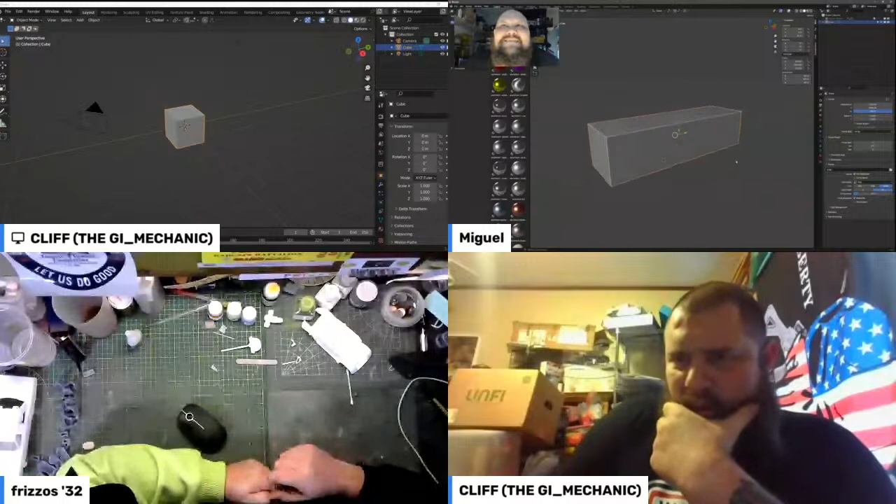I just have the switcher, so I just clicked on general for start off. Hey Frank, did you ever get it downloaded? Yeah, hey, I got it downloaded. What's going on, Jimmy? Yeah, I got it downloaded. Can I share it too? Cool, yeah, let's do it. Yeah, if you want to. All right, so we got that.

Let's see, click edit object, edit mode. I remember that. Woohoo, this is fun. And then face extrude. Whoop, no, that's a whole block. I just wanted to see. Yeah, whatever you have selected is what you're going to duplicate.

So just that part of the block. We wanted to run along the x-axis, which should be the left and right. So left and right. I'll show you a better way to do that, Cliff. You're taking really the hard road, to be honest.

Go back into the perspective where you're at an angle where you can see the perspective. Hold your middle mouse and rotate your camera around to give yourself a good view. Rotate it around so you can see the face that you want to extrude.

Now, I don't know if you know this, but pressing 1, 2, or 3 will put you into either vertex, edge, or face mode. Vertex is a single dot. An edge is a line between two dots, and a face is the flat plane between multiple dots. So put yourself in face mode by pressing 3, and then select the face that you're in.

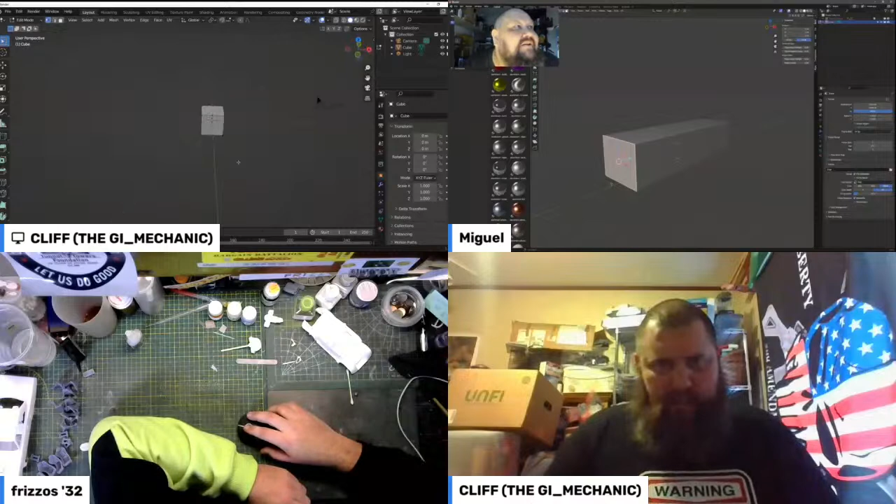Okay, move your middle mouse. Click your middle mouse and move your camera around. So click the middle mouse button. There you go, yep, okay. There you go, go, give yourself that view, yep. All right, at an angle.

You're trying to go straight on, Cliff. You need to get out of that mindset. No, stop clicking buttons. All right, put your mouse in the middle of the screen. Oh boy. Press the middle mouse button and hold it and move your mouse until you get a view that you want.

And you put yourself into that, you click that little button and put yourself into orthographic view or whatever. Press your 5 on your numpad on the right of your keyboard. Press your 5 to get yourself out of that.

If you go in and out of orthographic view, it does weird things about perspective, and it's annoying.

Okay, I couldn't get the view. I want you to have a basic view like this, look at my screen. I have my cursor in the middle of the screen, I'm pressing my middle mouse, and I'm moving my camera around. This is what I want you to do. Let me get used to moving your screen view here.

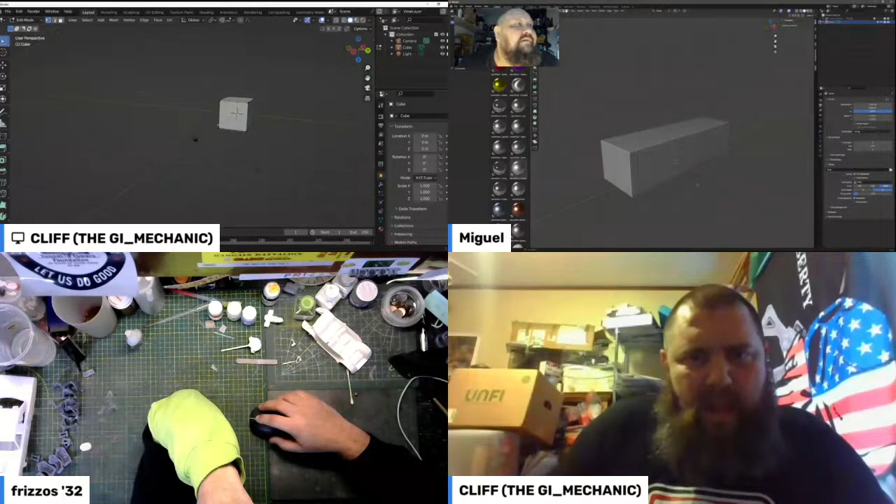There you go. Oh, you must be on a laptop. We're moving. I'm on a laptop, yeah, it seems to be a bit laggy. I got a separate mouse. Well, yeah, I know there's kind of lag, but that's okay. I've got a separate mouse, so it shouldn't be.

So anyway, back to what we were doing. Go ahead and get yourself into a perspective kind of like where I am, where you can see the face that you want to move or extrude. Okay, and then go ahead and select that face.

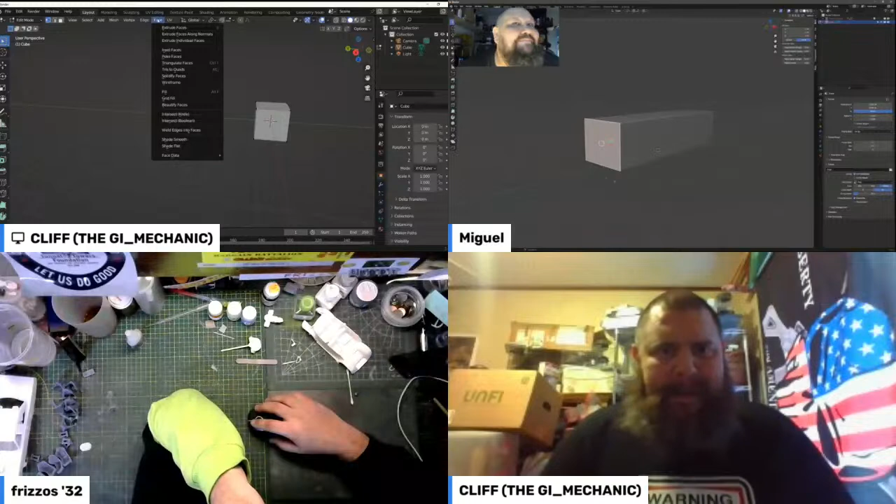And stop trying to put yourself at 90 degrees off angle. Look at my view, you gotta put yourself into a similar angle.

All right, I'm gonna have to minimize this for a second. Hey, Ron. What's up, Jamie? What's going on?

You want to be able to see the perspective so that you can get an idea of what you're doing. You don't need to be 90 degrees on, left, right, front, top to do this stuff. In fact, it makes it harder. You want to be fluid.

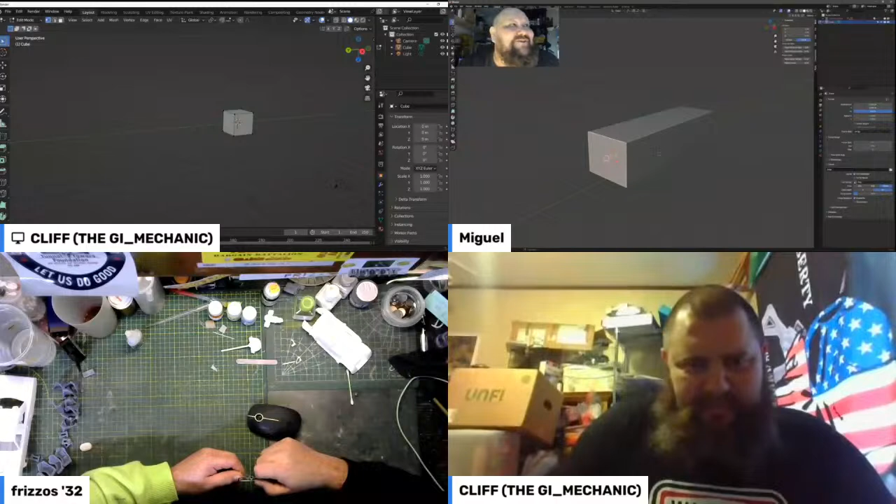I think that's part of my thing, I'm used to. I understand, but this is not 2D CAD anymore, this is 3D Blender. So click on that face, the face you wanted to extrude. Now I'm going to show you an awesome way to do this.

No, I didn't say drag and click. I said click on it. Are you in face select mode? Press 3, the number 3 up on the top of your keyboard. Now click on the flat face, just one click.

Whoa, what the hell? I just clicked. Nope, god dang it, that didn't work out. All right, hold on, I don't know what you just clicked. I just hit 3 when I clicked on the face. Well, that's because you hit 3 on your numpad.

You need to hit 3 on the top of your keyboard, not on the numpad. All right, top of the keyboard, here we go, 3. And it just brought me to that when I hit 3 on the top row. You know what, you're on a laptop and it remaps the keys. That's okay, that's my bad, I forgot you said you were on a laptop. I wasn't thinking, that's totally all right. Maybe that's why I'm struggling too.

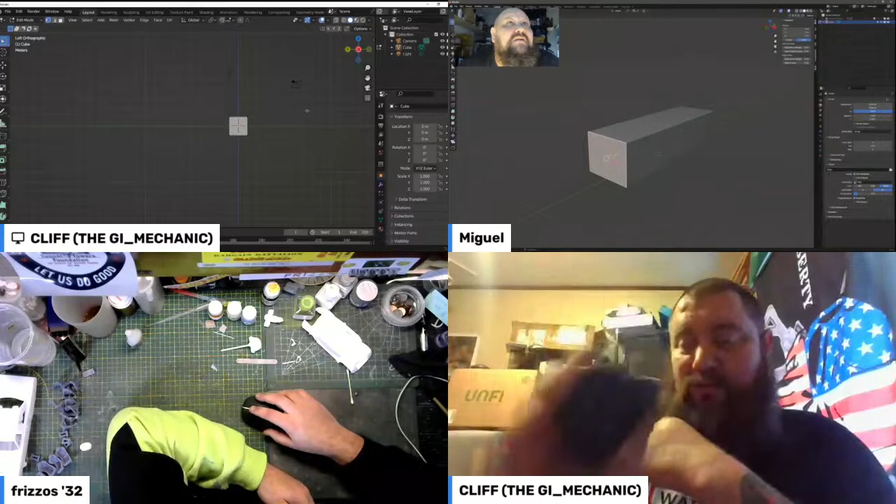I'm on a laptop versus, I got a separate mouse, which is cool, which works. Look it up? What, the mouse? Yeah, yeah.

All right, at the top of your screen, just to the right of the little dropdown where it says edit mode, there's 3 little pictures: one is a dot, one is a line, and one is a cube. Make sure you're in the third one, which is face mode. Click on that.

And then go click on that face on your cube. And there you go, see that? Oh yeah, okay, that makes a lot more sense now. You don't have to select all of the dots, you can select just that flat face if you're in the right mode.

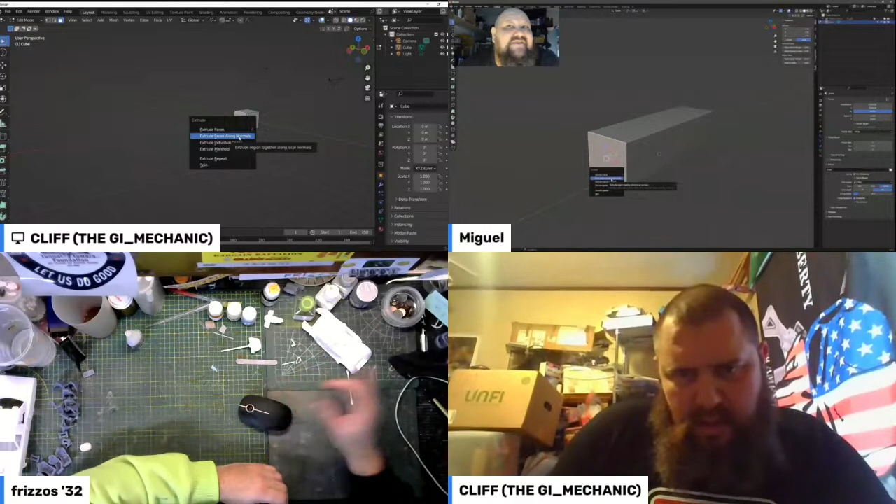Okay, so now hit Alt E. You should get a little pop-up menu that gives you the option to extrude: extrude face, extrude individual faces along normals. Now, in this case, because we have a flat face and we want to go straight out from that flat face, go ahead and select extrude faces along normals.

Along normals, and then move your mouse up and down, and you should be able to move it in and out. Now, if you hold your shift key, you go into a minor adjustment, so it slows down the edit that you're doing. Instead of doing it super fast, you can slow it down.

So now you've extruded that. If you wanted to get a specific size out of it, you could hit 7, 1, or 3 to go into those side views, top views, whatever, and then use your G key to move those faces to the specific grid point that you wanted.

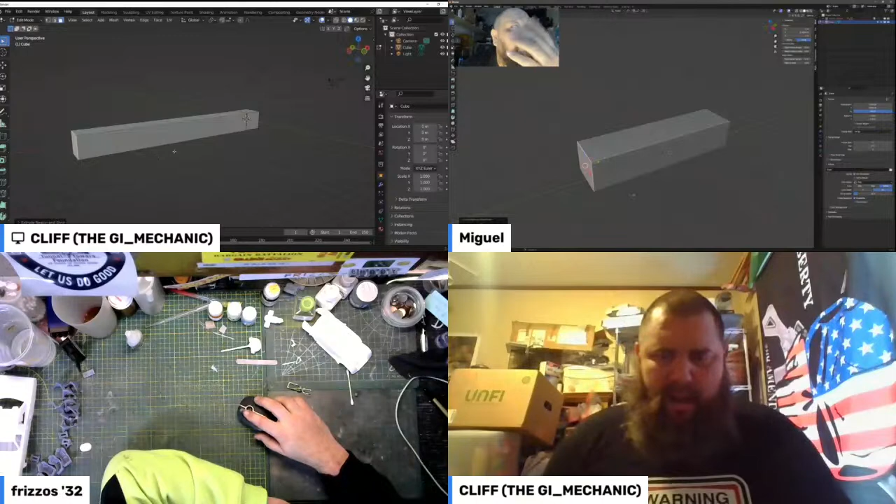At this point, we're not really making anything specific, so we're just kind of playing with controls. But go ahead, and now I'm going to show you something.

Move your mouse cursor over one of the edges and press Control R, and you'll see a little yellow line appear. That creates an edge loop around the object, and if you click your left mouse button once, you can slide that up and down the edges it encompasses. Position it into the location you want, and once you're ready, press your left mouse button again.

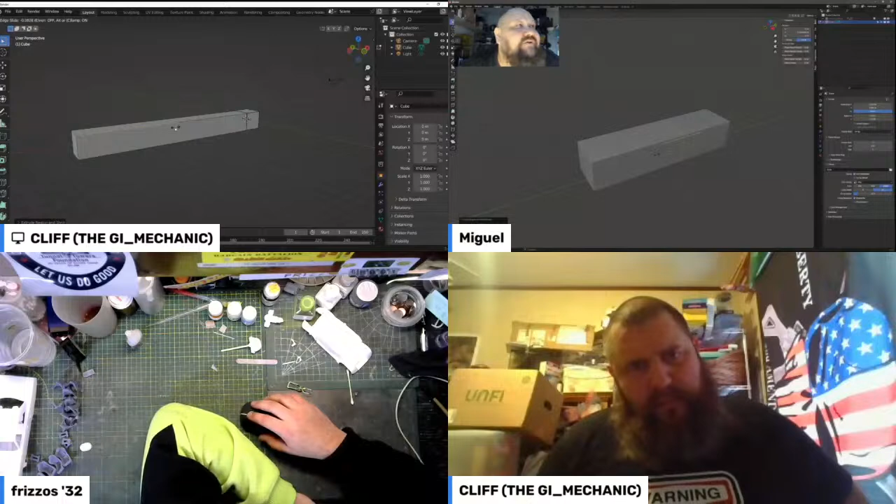Now, the thing to notice here is if you click that little cube at the top again to make sure you're in face mode, because doing that puts you in edge mode. Go back to face mode. You'll notice you have multiple faces now on the side, one on the left and one on the right. You can click those faces.

Look at that. So now if you do that Alt E where you're extruding along faces, you'll push that face away from the object, or into the object if you're trying to do a recess. You'll see how you can create little appendages.

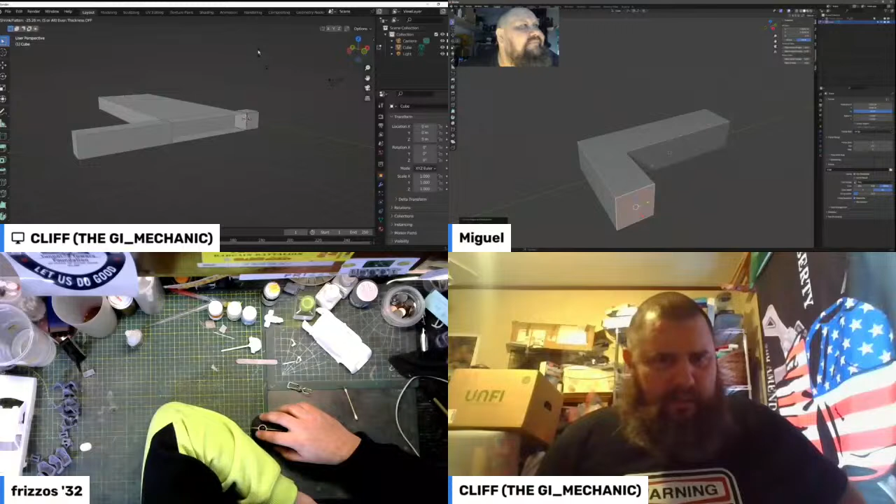That's awesome, we're good for doing a cross member. Yeah, because that was the biggest problem I had—trying to get the shapes the way I wanted them, but getting them lined up between the different perspectives.

Well, that's when you've got to use your X, Y, and Z's. So go ahead, let's start over. Hit Control N, then G, then D for don't save. Control N creates a new file, G is the type of file, and D is don't save. So we're basically just starting from scratch.

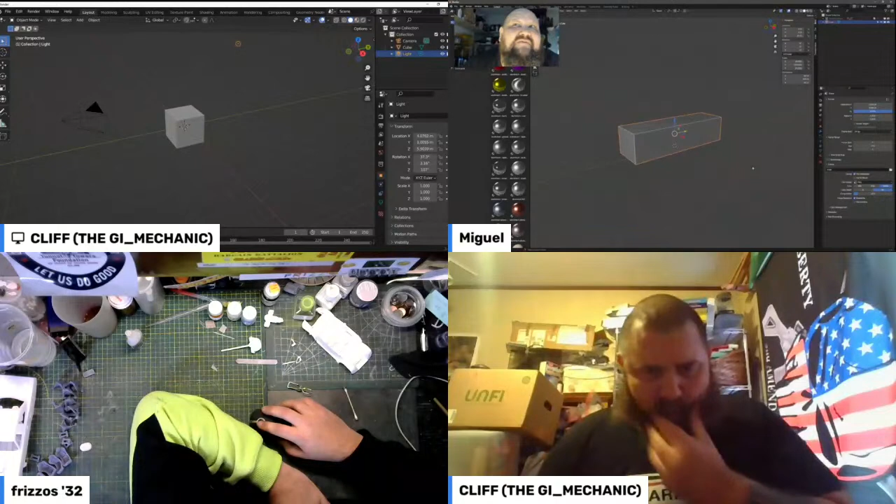So what I want to show you is that thing we were talking about the other night. If you hit G and just move your mouse, you can see the box just moves freely around. Go ahead and do that—don't click anything, just hit G on your keyboard, and move your mouse around.

This is kind of annoying because you can't control where you're going. But if you hit X, Y, or Z, you can lock it into that plane of movement. So you hit X, and now if you hit Y, it'll move to the Y axis instead of the X axis. Z likewise.

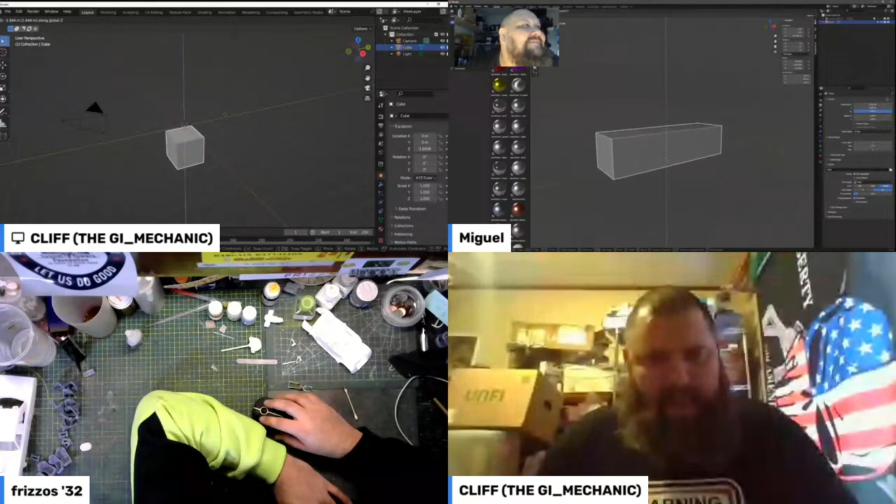Once you get it where you want it, you can press your left mouse button to lock it into its current location, or you can cancel by hitting your right mouse button, and it'll go back to wherever it was.

Awesome, so now we've got this cube. Let's go into edit mode, and then hit Control R to create a loop around the cube. Hover your mouse over one of the lines on the cube—it doesn't matter which orientation. Then left click it and then right click it.

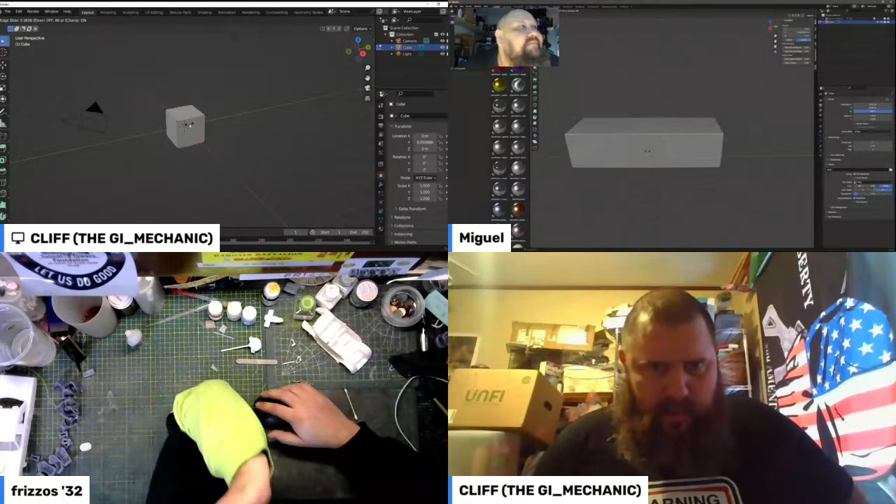Left clicking says yes, I want to go ahead and create the loop cut. Right clicking cancels sliding it up and down, so it'll move it right in the center.

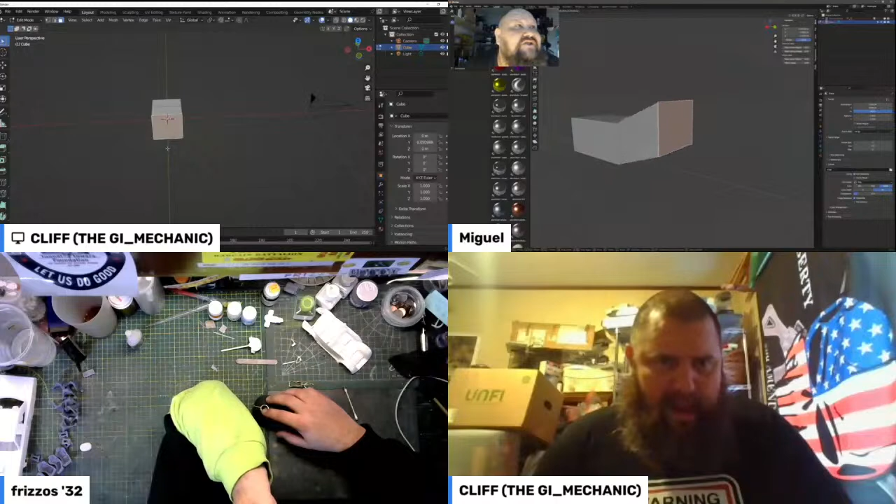One thing I wanted to show you: rotate around to one end of the cube, make sure you're in face select mode by clicking the little cube up top, the 1, 2, or 3 option. Now click on the end face, hit your G key, and you can do the same thing you did with the whole object, but with just geometry—one vertex, one edge, or one face.

You can move things around, and just like moving objects, you can press X, Y, or Z to lock that movement into an axis.

Or to get really fancy, you can press R instead of G. If you right click, go ahead and right click and cancel that. Now press R, and you can rotate it.

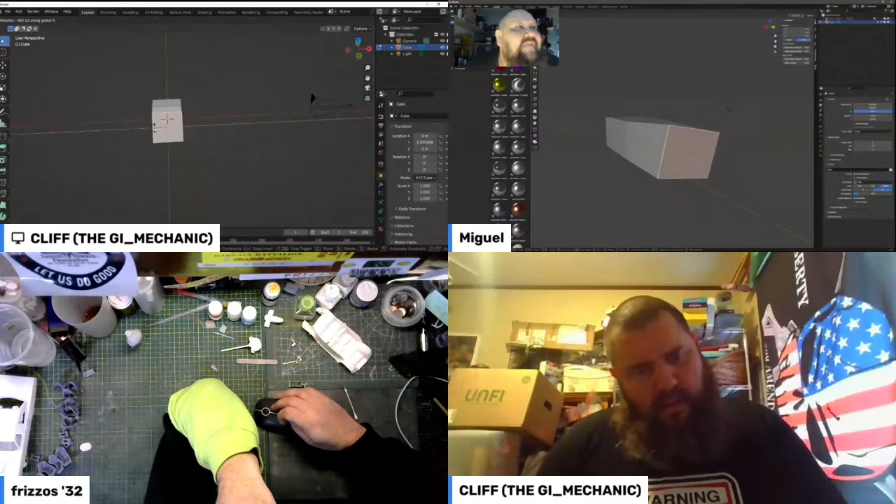Rotating it is based on your camera perspective unless you hit X, Y, or Z. If you hit X, Y, or Z, it will rotate whatever you have selected on the axis you specify—so the y-axis rotates the geometry around the y-axis, or the x-axis if you press X, etc. Go ahead and test that out a little bit to get familiar with it.

Notice how it's maintaining a connection between those vertexes and the next one in the line, which is like your halfway point on your cube. It's maintaining the line between. That would actually work for making something like springs. Yeah, you can do all kinds of stuff with this.

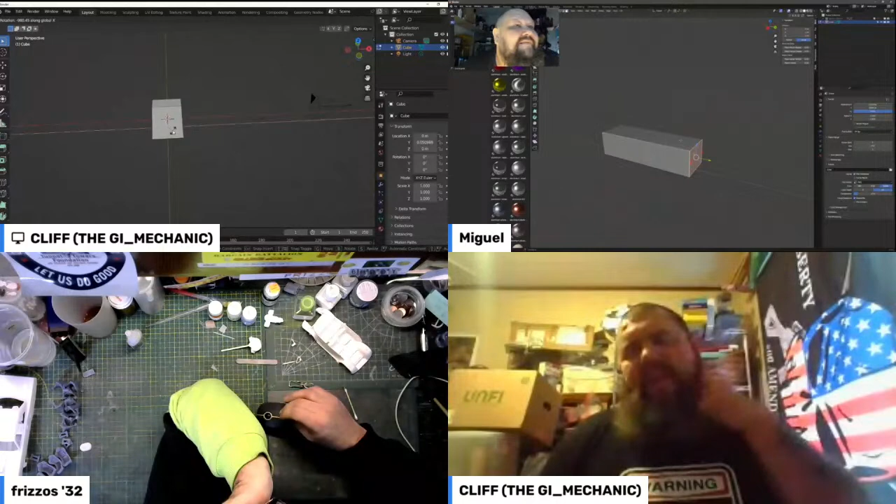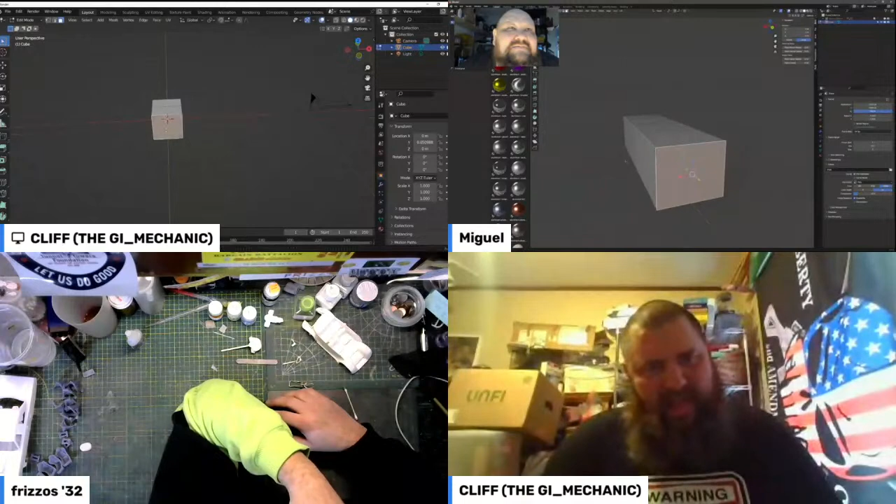I don't know, maybe I was thinking like 2D stuff. That was true because I started messing with grease pencils. Let's try doing something like that. Honestly, I don't even use grease pencil. That stuff is way too technical. What's the word I'm looking for? Tactile, like you gotta draw. It's just too technical to be useful for what I do. In hard surface modeling, I don't need the grease pencil. I don't need the knife tool. I've used the knife tool maybe twice since I started learning Blender. It's just not that useful to me.

Okay, so put yourself in vertex mode instead of face mode, which is the first of the little three cubes up top.

Wow, all right, yeah, let me. There we go, you're having fun. I forgot to click off. I'm trying. That's okay, just keep in mind right-clicking cancels whatever you're doing. So that's what I forgot doing. I went to go click... I didn't mean to do that.

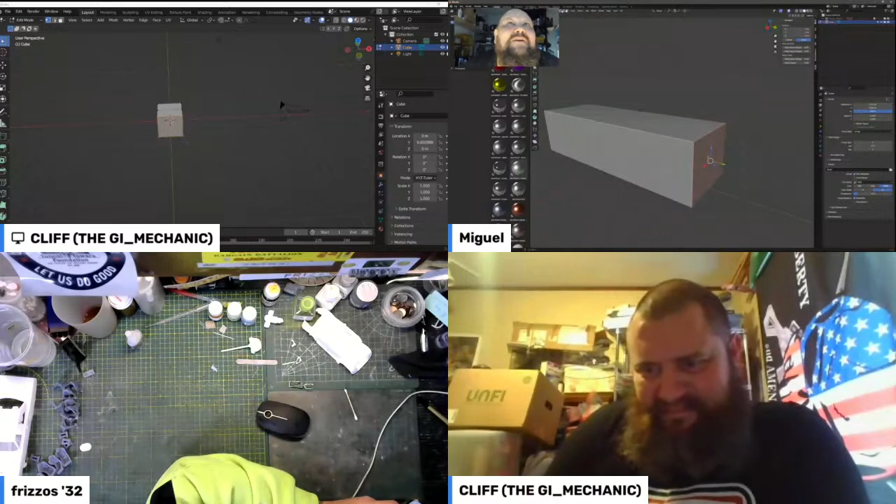You can just right-click. So if you put yourself into vertex mode, which is the little dot icon next to your edit drop-down, you can click one dot at a time, and just like moving the object or the face, you can hit G and move one vertex around. You can move one little dot and change the whole shape of the object.

Jamie, we're going to do this probably two or three times a week. We're going to do this on Tuesdays, Thursdays, and Saturdays. Sounds good, and I do much appreciate it.

Just like the others, you can hit X, Y, or Z to lock your movement of that one dot into the X, Y, or Z planes.

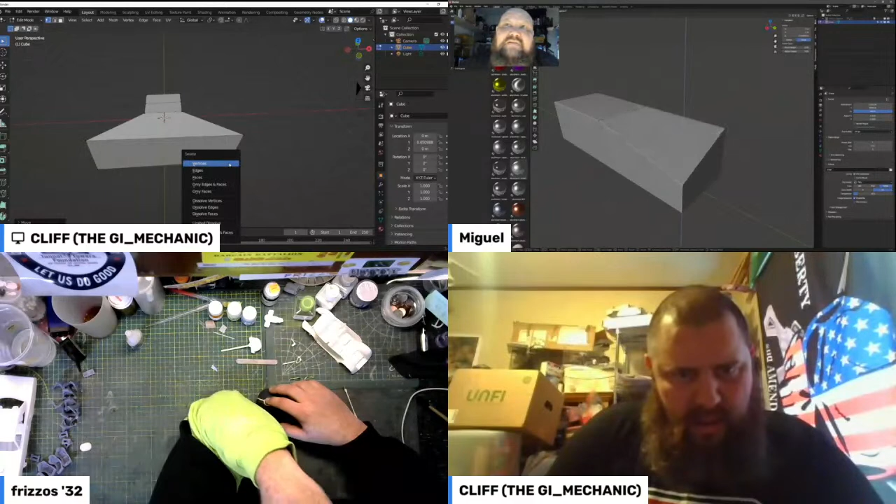Oh, that's right, never mind. All right, we got that. We got that.

It's really these basic controls that you need to get really comfortable with, because when you get comfortable with these controls, you can do things so fast.

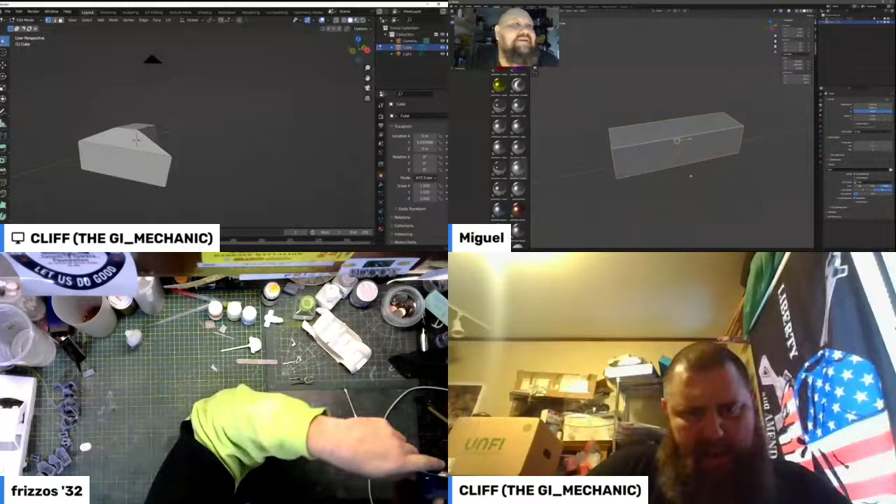What's up, John? I've been glad to see your little shorts and your little videos you've been posting lately. It's good to see you active again. What's up, Dan? Looks like an air shop vent. Yeah basically, that's what I don't know. I was just going something a little different, grabbing, pulling edges. Daniel, John, how we doing?

So let's do this. Let's hit Tab to go back into object mode instead of edit mode. Then click on your object and press H to hide it. All right, there we go, hide. Now hit Shift+A and that'll bring up a little menu. Select mesh, then cube, and that'll give you a new basic cube.

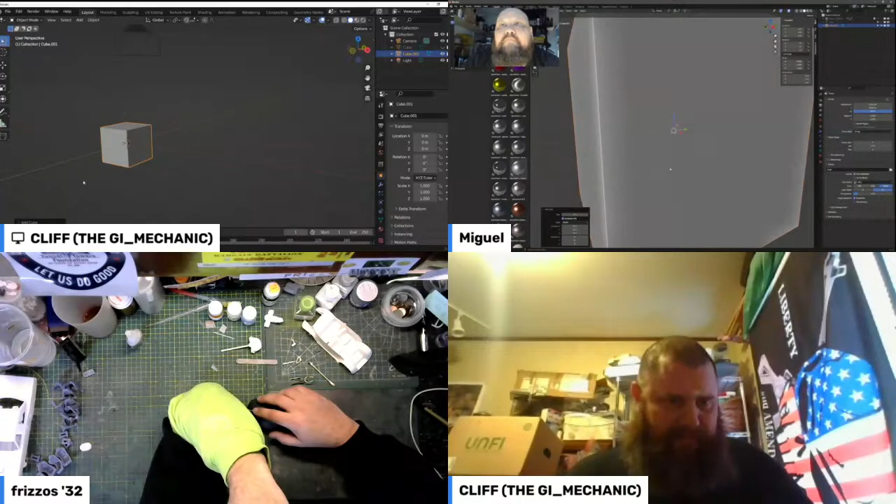So if you hit Tab to go back into edit mode, I'll show you another trick, and we'll put a loop cut around the center. We'll hit Control+R right around the center. Hover your mouse right around the center of the box. There you go, yeah just like that. Either one of the vertical ones, let's do the vertical one. Okay, that'll work.

Yeah, all right, we click E. So now let's go into face mode, press the third little icon up there. Now what I want you to do is select one of the side faces, or in your case, the top face of your cube.

Now while you have that selected, hold your middle mouse and rotate your view so that you can see the opposite face, the bottom. Rotate it so you can see underneath. Yeah there you go, now hold Shift and click on the bottom face.

So you always start off with a cube. Now you have them both selected. You can hit Alt+E and do extrude faces along normals, and you'll extrude them both at the same time. Oh yeah, that's awesome, that's what I'm talking about.

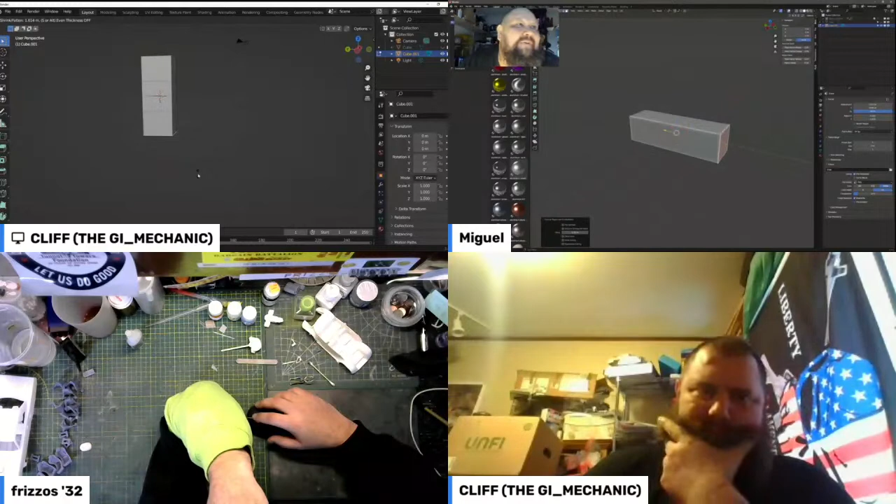This is useful if you're doing things like making leaf springs. You want to start with your center perch and then move out. There's all kinds of different approaches. Symmetry is one of the biggest tools in Blender, it's awesome, I like that.

I like that. And another thing is, like in my case, if you see my cube, let's say I was making leaf springs, let me make that bigger so we can get kind of an idea. Now I could come back, and if I hit Alt+Z, I'm in X-ray mode.

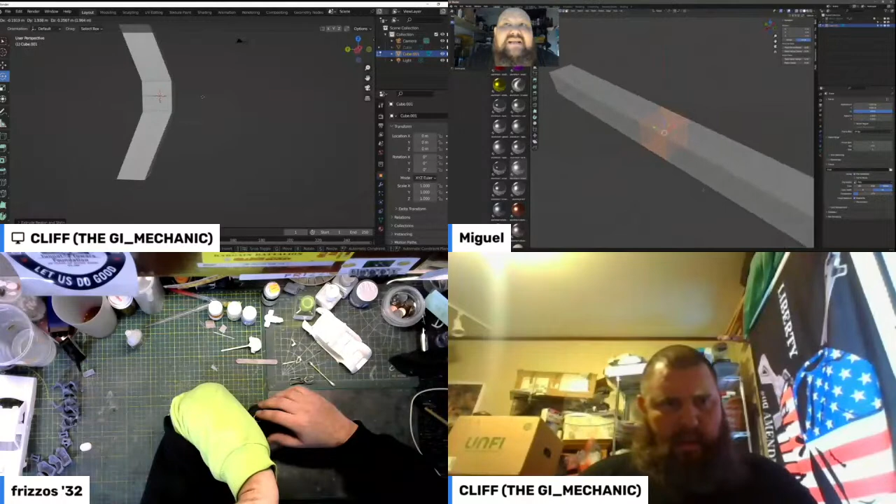You can kind of see through it. If I switch to vertex mode, I can see all of the vertices in the model, and I can click and drag to select them all at once while I'm in X-ray mode.

X-ray mode has an icon at the top right of your screen, it looks like two little cubes, one inside the other, to the left of the four globes. You can turn that on and off to see through your object and see all the geometry, the dots, edges, or faces, depending on what you have selected.

So now because I have those selected, I can move them up or down to give myself the shape that I'm looking for.

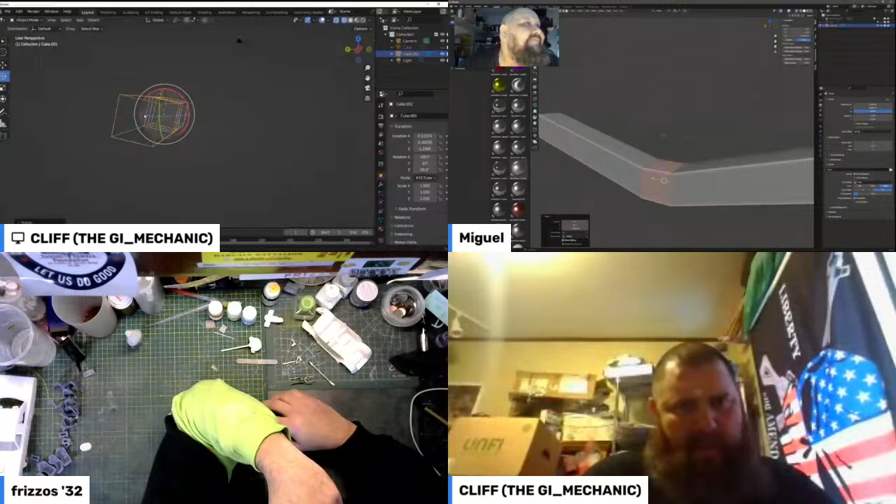I'll show you another useful thing here once you're ready. Oh, you've got it rotated? Yeah, there you go. Let me show you something, Cliff. Go ahead and right click to cancel that. All right.

This is a Windows program, I'm assuming you're using it in Windows. So like every other Windows program, you can hit Control Z and it'll undo whatever you just did. Go ahead and hit Control Z until you get your cube back to a straight and level orientation. All right, give me a second.

Control Z, and see how you can step through it. So now you have, oh, you went too far, you went back to your basic. That's okay, see if you can get it back the way you had it.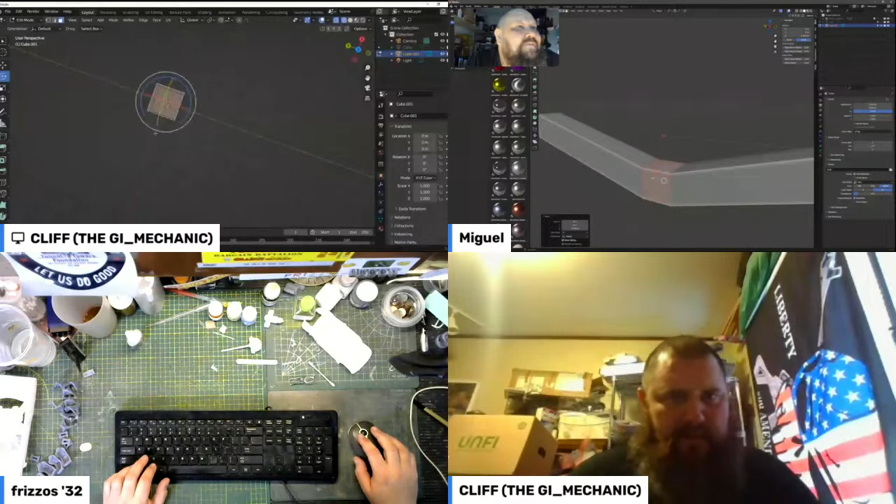We gotta go edit mode, faces, change camera view, click on face. What's up, Brian? Blender, that's 1, exactly right. Blender 101. No, Blender 1. Blender 01. 0001.

Oops, I forgot to do the bottom side. Let's see, on the face. Shift click to select an additional geometry.

All right, hold on, probably. Anybody that wants to do some Blender stuff, you're welcome to jump in here. We're going to do this a couple times a week.

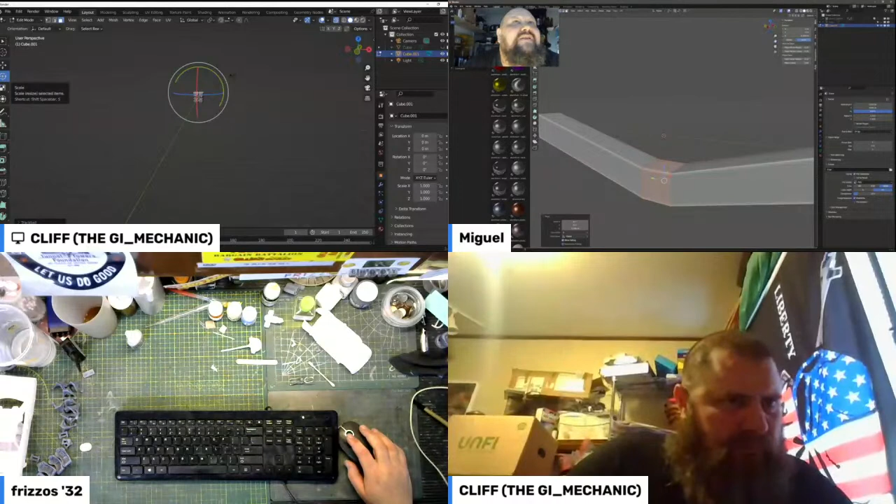The reason you have those circles around it is because on the far left you see the list of icons, those are your tools. You have the rotation tool selected, so go ahead and select the top one. There you go, you're back to normal now.

The other thing I'll show you, let me show you another neat trick. If you click on your object, or a vertex, or a face, or anything, you can press the period key on your numpad to center your camera on whatever you have selected. It zooms right in too. Crazy.

If I was on the big PC. Well, maybe one of the future ones, Dan, Brian, you guys can jump in here, you're welcome to mess around. Yeah, definitely, like I said.

So take yourself out of X-ray mode, and then you won't accidentally click on the back side of things if that's a problem. But the advantage of being in X-ray mode is if you can see the backside and you want to select them, you can drag select both the top and the bottom at the same time.

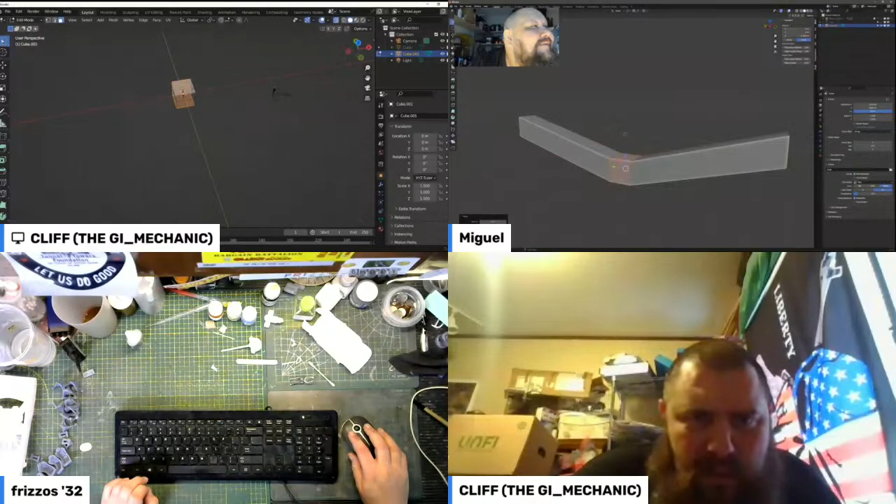Shift click. Did I put that box into? Yeah, I'm sure I did. You selected another box, yeah, or another face. There's that one, and then there's shift. Boom, there it is. Faces is highlighted.

All right. No. Okay, well, we're extruding along that axis. So...

I don't know what you're doing. Just stacking boxes, that's all. Let's do this, Minecraft, right click to cancel. He's doing Minecraft, what are you doing? Let's go into click and right click, object mode, let's go into object mode and reset. Shit, we'll be here till Tuesday.

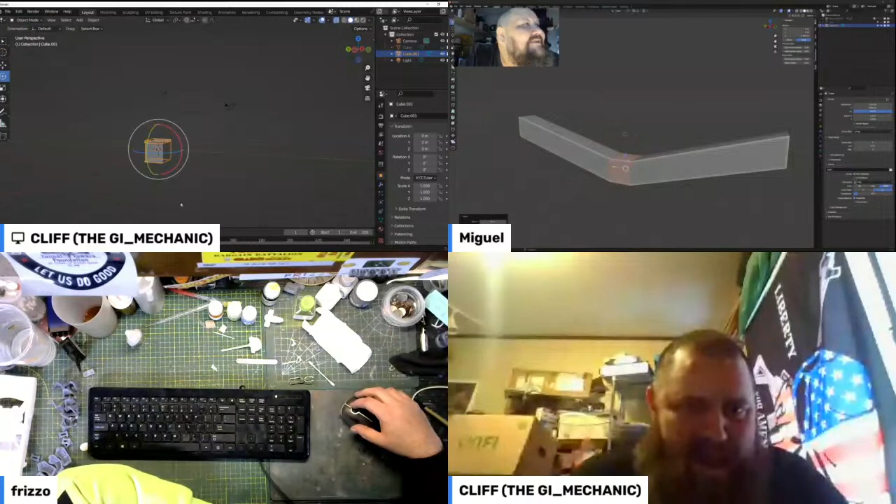You just hit your tab key, you put yourself in rotation mode again. I don't know what key sequence you're hitting to put yourself in rotation mode, but click the top icon in your toolbar. On the left toolbar, on the left tools, press the top one.

Click the top one. Got it. All right, so now let's delete that cube and start from scratch. Hit your delete key. X delete, I got good at delete, okay, so X works too.

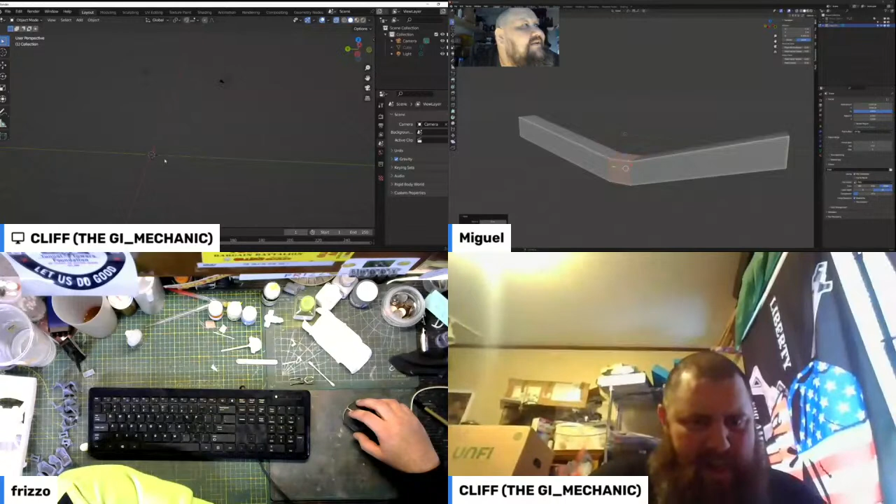Go ahead and hit Shift A and create yourself a new cube. Don't use the menus, I want you to learn the hotkeys. Hit, now listen to the words coming out of my mouth, Cliff. Hit your delete key, not your X key, your delete key. There you go, then you don't have to confirm it.

Now Shift A, not Control. Whoops, sorry, my bad, I'm in Control A. Mesh, and select Mesh Cube. Booyah. Yep, I see. Boom. All right, so now tab to go back into edit mode.

And now do a Control R and create yourself a little loop right in the center of your cube. And boom, you're back to where you started. Left click. So now put yourself into face edit mode and let's select those opposite faces.

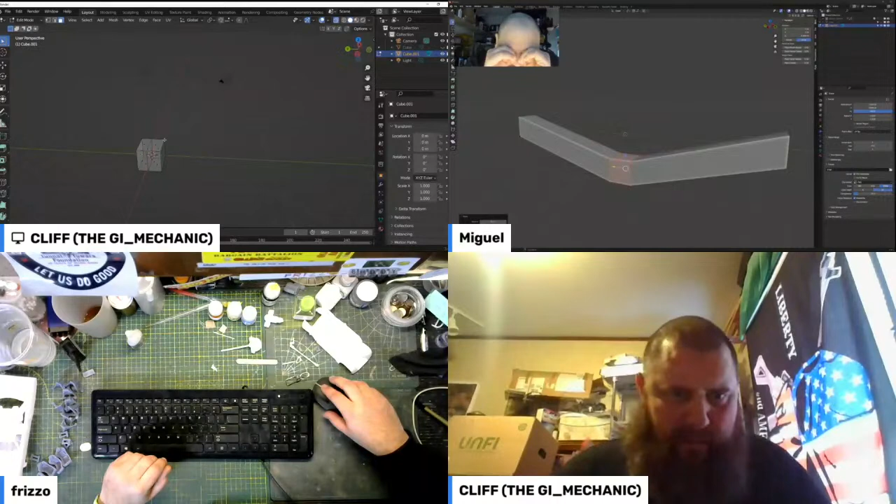No. I just have a glorified box. What's that, Frank? I just have a glorified box. 3D. Well, that's all I have. Now you can do your Alt-E, extrude along normals.

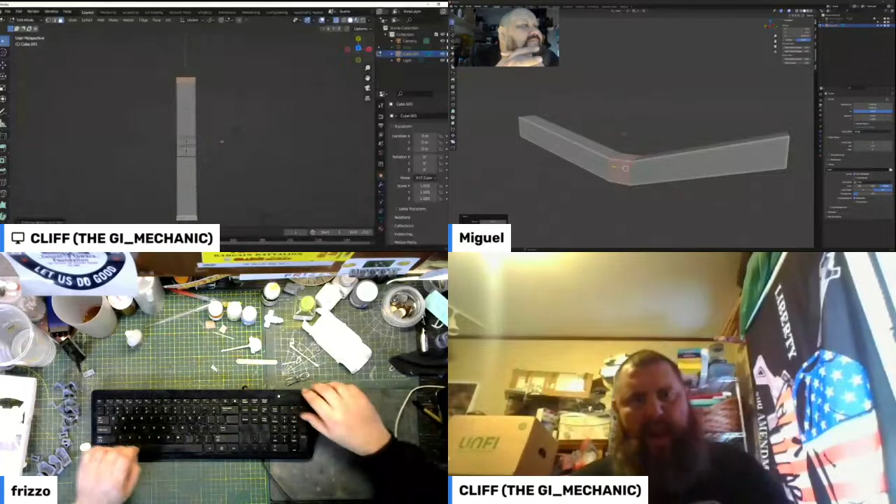You can't see what you're doing because you're... there you go. Cool, yeah, that works. So now move yourself to like a 45-degree view so that you're not straight on any one angle.

Do you have, I can't tell, do you have, yeah, you have X-ray mode on. Turn your X-ray mode off. I want to show you another neat trick.

All right, so make sure you're in the face select mode. So you, okay, and then if you hold your Alt key and then click next to one of the little edges on your object, it will grab all of the faces around the loop of the object next to the edge that you're selecting. So Alt and then left click near one of the edges, not on it, but near it.

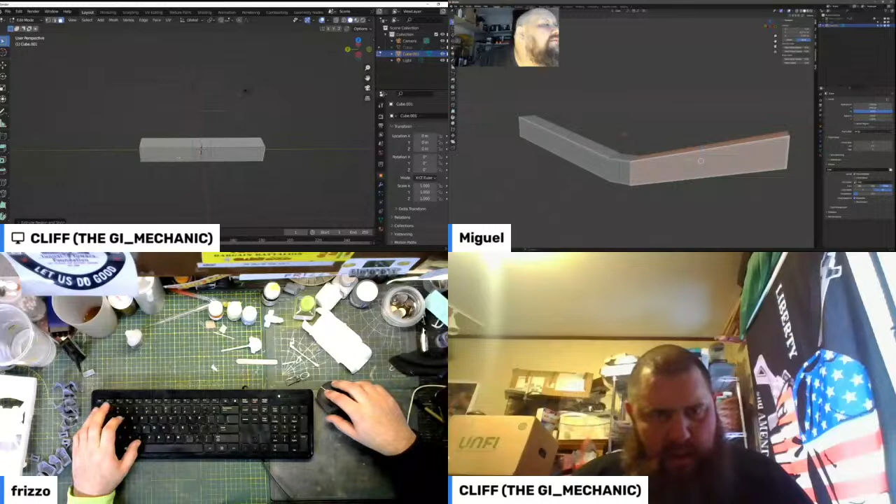Hold your Alt key while you left click. Yep, that's what I got. I'm holding the Alt key and left clicking. Try just left clicking, let me see. Maybe your hotkeys are set up different. Oh, there it goes, okay. Whatever, now try Alt left clicking around one of the edges.

Not working? Wonder why. No. That's like a default hotkey setup. It must be because you're on a laptop. That's weird. Well, if you can see my screen probably, I'm sure that's probably part of the problem. I'll show you what I was trying to show you.

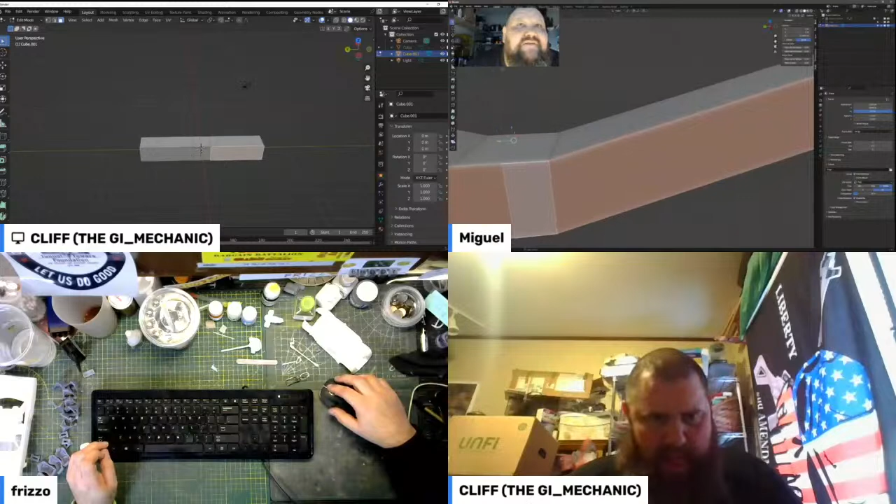But if you Alt and left click near one of these edges, it will grab the loops around the face along that edge. So if I went this way on this edge, it would grab the loops or the face around the loop that way. Or if I could do this one, or I could do this one.

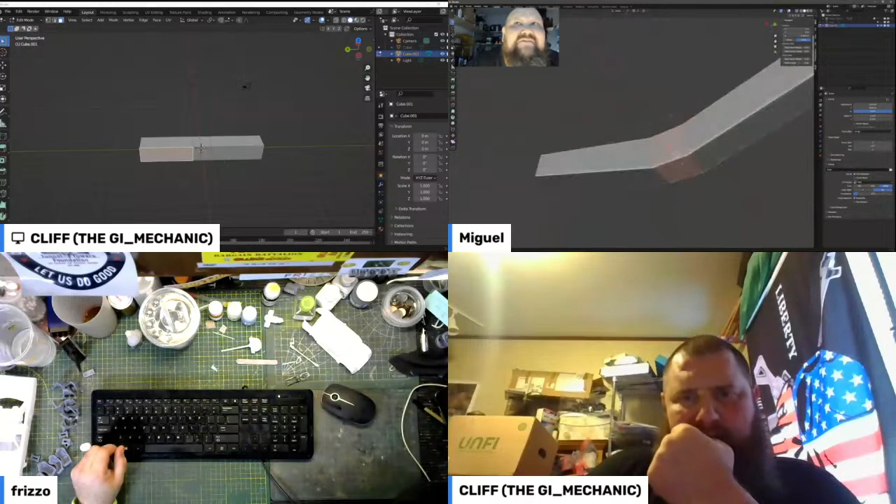So that's, or I could even do something like, well, what I did was I went into X-ray mode and then switched to vertex select, and then I just drag and select all of the middle vertexes, and then I take myself out of X-ray mode and then just move these up and down. And just imagine we're creating like a leaf spring kind of a thing.

The reason I wanted to show you this is because then if you're in face select mode, even though I have an edge loop here, I can select both of these, and then I can do that extrude along normals and create my little perch.

All right, I'm seeing that. I like that. And then it works just the same thing, I can select along the loop of the object.

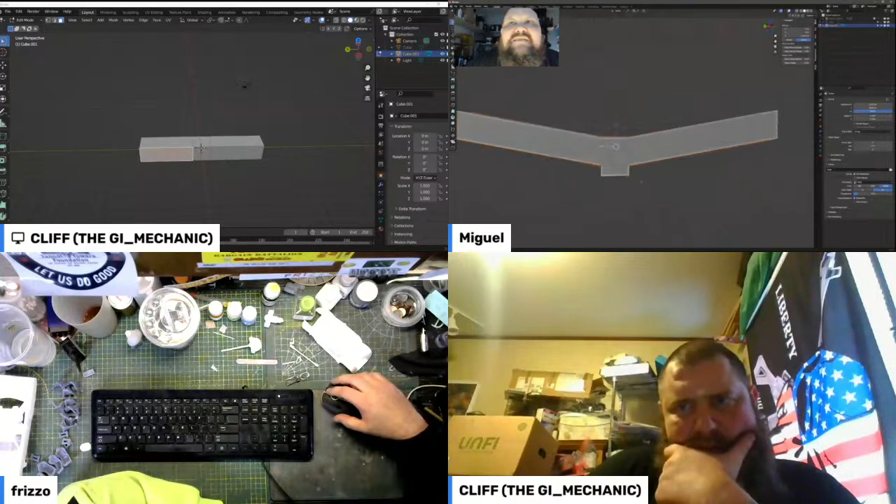Learning these little controls is what's going to make Blender so easy for you. You got to learn these controls. Until you know how to control the objects and the verts and the faces and stuff, you're not going to be happy with Blender. It's going to drive you crazy.

Yeah, that's what I've been doing, watching some of the tutorials and going along with the guy, and then it's like I get some of the stuff and then try to sometimes put it together, and then it just all sorts of gets fucked up. So yep, that's gonna happen.

So I just put an edge loop in the middle of each one of these sides and create like a little bendy. And then what's fancy is if I select both of those, when you have any edge selected, you can right click.

You have an option for a bevel, or you can hit Control B which is the default hotkey, I'm pretty sure. The great thing about bevel is it will divide your geometry, and then you can use your mouse wheel to increase the resolution of that division and create a nice little curve. Look at that.

Can you make that skinnier? Ooh, and then put like leafs? Sure. Yeah, sure. That's awesome. That's holy shit.

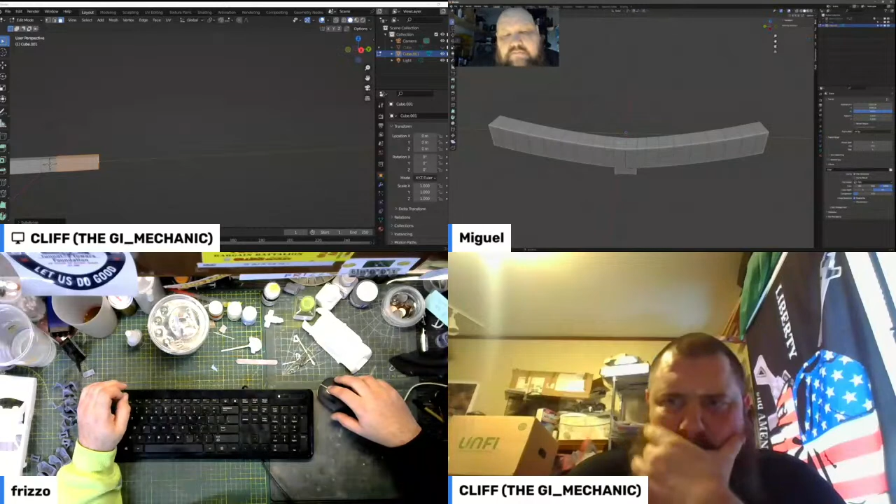So if I select all of those, you start off with the faces, box first, and then you work off of that. You just pull it, stretch it, and manipulate that little box. So like if I select all these top faces, I can go...

Extrude. No, I don't want to extrude on normals, I want to extrude straight up. And then I can take this face and this face and extrude those. Oops, that's not what I meant. Out and up, and then I can just do it again.

And then loop the end one. Grab that, make it longer, and then you can loop it. Do one more, and then make it longer, and then loop it at the end.

Cliff, watch this. Can I right click? And now you. No. So then, what I'll do is...

I'm gonna extend that a little bit more and bring it up so that it looks more like the angle it would be.

What I'll do is I'll create an edge loop here, let's say about right there, and then one here. Watch this, Cliff, magic. I'm like engulfed. Can you do the one side and then just copy the other side, or do you have to? Yeah, and I'll show you how to do that too.

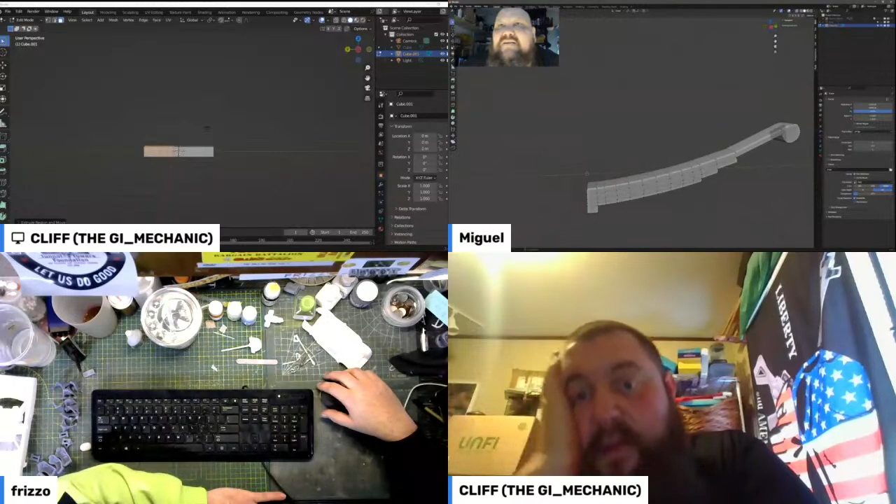And then there's a tool over on the right pane. If you click on the little wrench, there's a drop-down modifier called a mirror. I just hit that mirror, and then I want to mirror it in the Y-axis. And boom, now it's mirrored.

Damn, so anything I do to the right side, it'll do to the left side. So like if you want to make a chassis, Cliff, you just do the one side and then just mirror it. And then mirror, cut it, mirror it, yep.

Okay, so now I know where I was messing up. On the right, do the whole right side, and then copy it to the other side. And I'm actually gonna redo this, I don't like the way this turned out. So I'm gonna select all these edges here, like you do just the one front, you just do the one profile of the frame.

And then I'm gonna bevel that again because I didn't like the way that one turned out. Man, that's amazing.

It's amazing because he makes it look easy. No, that's all right, that's just what I'm trying to learn here. All I'm doing is moving and sizing different shapes, different geometries. Once you learn these controls, it's really not hard. You got to be able to master the basic movements though. Once you get that down, everything from there is like super simple.

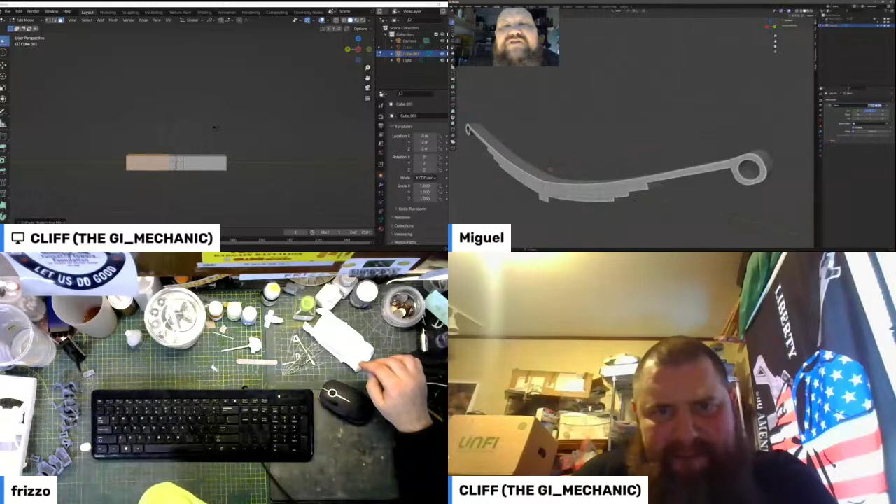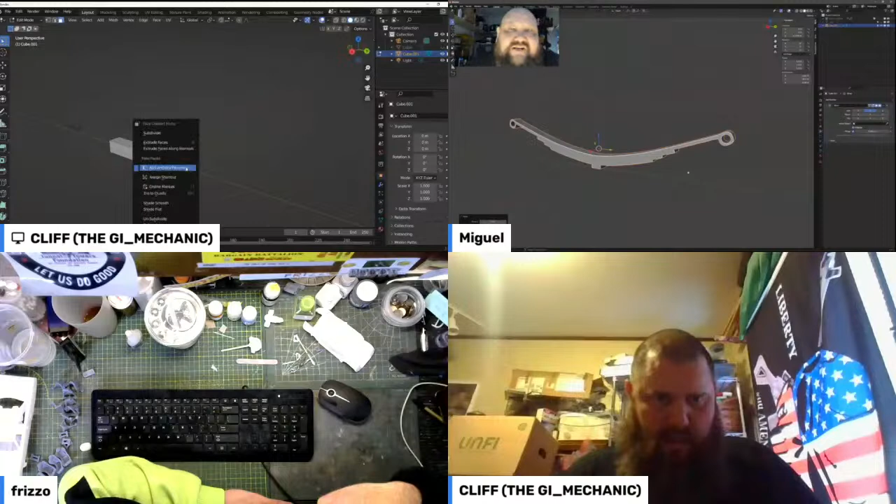Daniel wants to know how you scale it. I don't think you worry about that now, right? You can scale it in Chitubox. But once you get your model the way you want it here, just hit your S key and you can scale it up and down however you want. You'll notice over here on the right, you got this little box that shows you your size, how big your object is. So you can scale it in Chitubox or in Blender, it doesn't really matter which one. It's probably easier to scale it in Blender if you know you're going to be doing things in 24th scale, to just do everything in 24th scale. Then in Chitubox, you can scale it down. 96% will give you 25th scale, or you can go up like 200% is obviously 12th scale, or 150% is 16th scale. You can kind of use those ratios to easily scale things up and down from there. So I find it's better for me to just create everything assuming it's 24th scale, so that when I import it to Chitubox, it's easier to size things up or down for me.

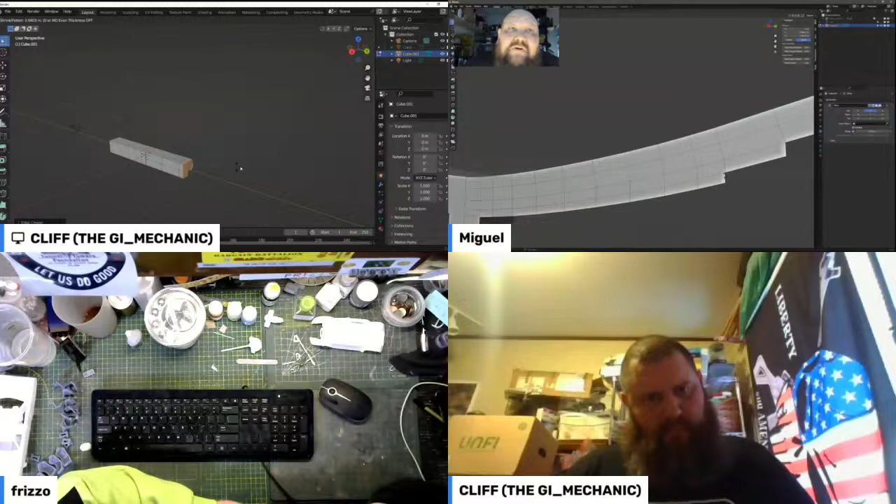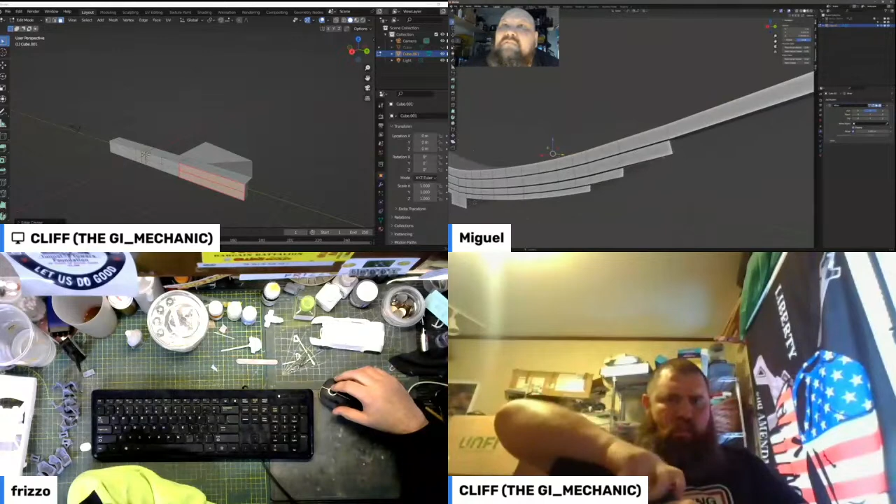One thing I want to do is create the little edges in between the springs here, so I'm going to create that loop. And I'm going to move it next really close to that edge. This is where I was showing you that alt click, by selecting that loop. Then I can use that extrude along normals and create a little inset. I just repeat that with all of them, and that's going all the way through to the other side. See, when I create this new edge loop, it goes all the way around the object as long as all of the faces along the path have 4 corners. If you have any faces that have 5 corners or 3 corners or whatever, then it breaks the loop and it'll stop at that face. Otherwise, it'll continue all the way around the object. So there, I've created little edges.

I will bevel these corners to give it a little rounded effect.

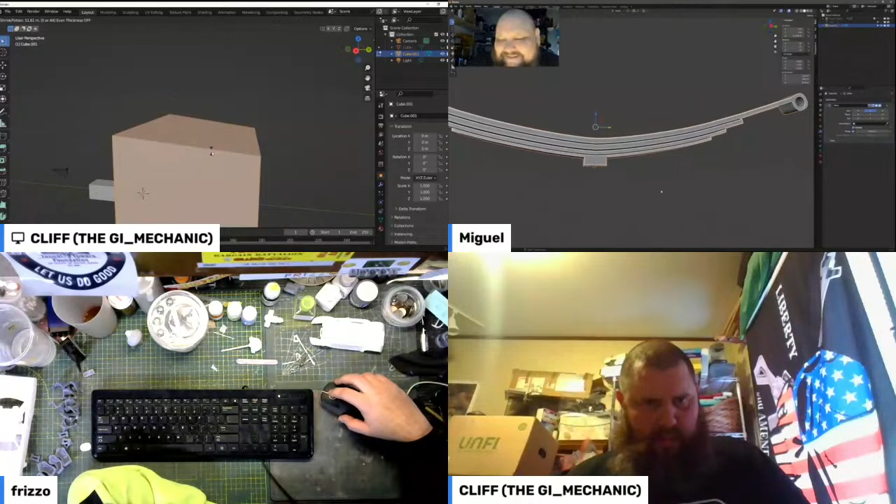It's simple for me to tell you what I need and let you do your magic. Yeah, I guess that's true, Fred. And you know what, I'll be honest, you guys are gonna have to be a little bit patient with me because I'm a terrible instructor. I can do this all day long, but you're doing awesome. You did fantastic because you actually kind of helped me out quite a bit, actually.

Let's practice scaling up and down the STLs that Mig sent me a while ago. It's easy. Then I can print it on my printer.

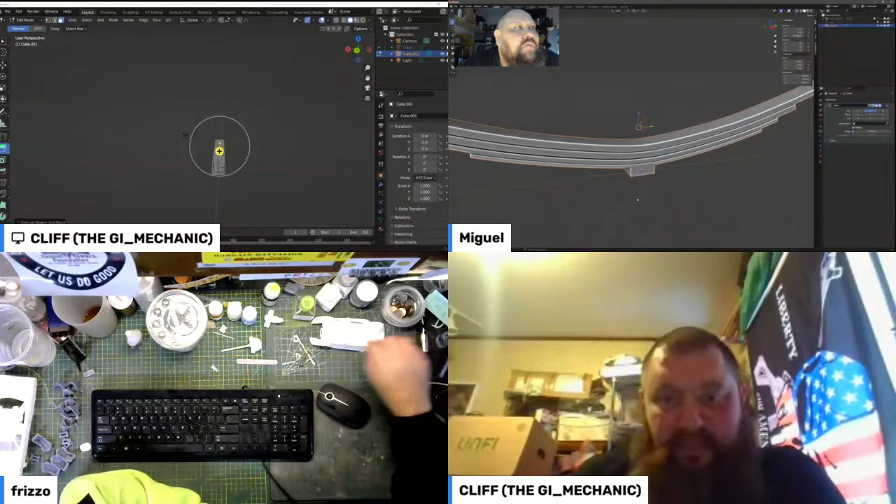Well, that was interesting. Cliff, is this the computer that you always use when you're messing with Blender? Yep, it's the one I use for my live streams and everything else. This is the one I dropped in the elevator. When you're messing around in Blender, is it a little bit laggy for you, or is that just the video we're getting from your connection? It's laggy as hell for some reason, I don't know why, probably my computer. This computer is old as balls, I bought it before I went to Ukraine. But for you, when you're using your laptop, if you're not streaming, if you're just on your own messing with Blender, is it laggy like that for you? A little bit, yeah, it does lag a little bit. So that's why when I move the mouse it catches up. It's weird. Right, yes Steve, I did get your email about the van toppers, and I think it's a great idea, something I can definitely put on my to-do list for sure.

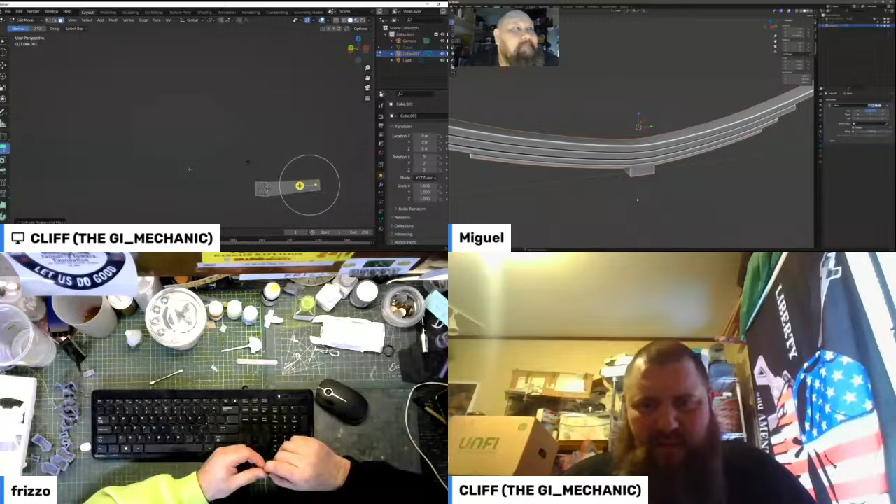Nothing funnier than when Mig goes off when he loses patience. Oh my God, I'm so terrible at that. Sad part is I'm used to it, as far as sometimes being an instructor, no shit, there was. I mean it just happens, it's not a big deal, just don't take it personal, because in the end it's all just trying to help. So get and use a gaming computer. I agree, it's always a good strategy to have a powerful computer. Yeah, this one's probably a little broken, a little retarded, but mine, the little computer's working fine, no lag, nothing. Yeah, you just got a new one, right? Windows 11.

Whatever, I just can't figure out how to get my screen to come up here. There should be a little arrow down at the bottom. Yeah, if you click share, the window pops up, and you can pick your entire screen, which is your monitor, so everything on it will show.

Or you can pick specific windows. If you go to window, you would just select Blender, for example. But I don't see that in that section. That's weird, you don't see Blender? Do you have Blender open?

Yeah, I have Blender, and then I go to window and it just says Live Studio, that's it, the restream. It doesn't see Blender as one of the windows? Huh, yeah, weird, but it is open, so I have to minimize and then open it. It's on the bottom of the taskbar.

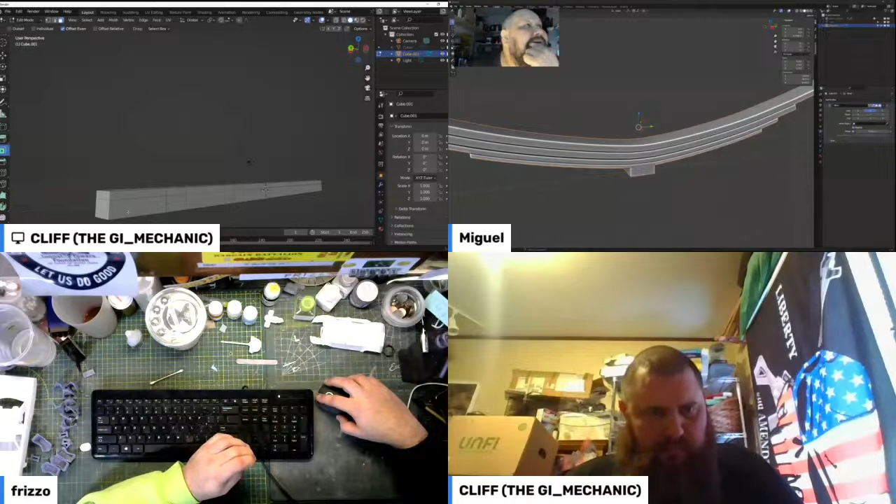What if you do entire screen instead of just the window? I can do that, but then I can't see you. Oh yeah, I gotcha, that's what I'm doing, because I've been going back and forth. When you see my Blender stop, that's what I'm doing. All right, so you're seeing your screen only.

Yeah, so you don't know what Miguel's doing. Right, I have to flop between screens. Okay.

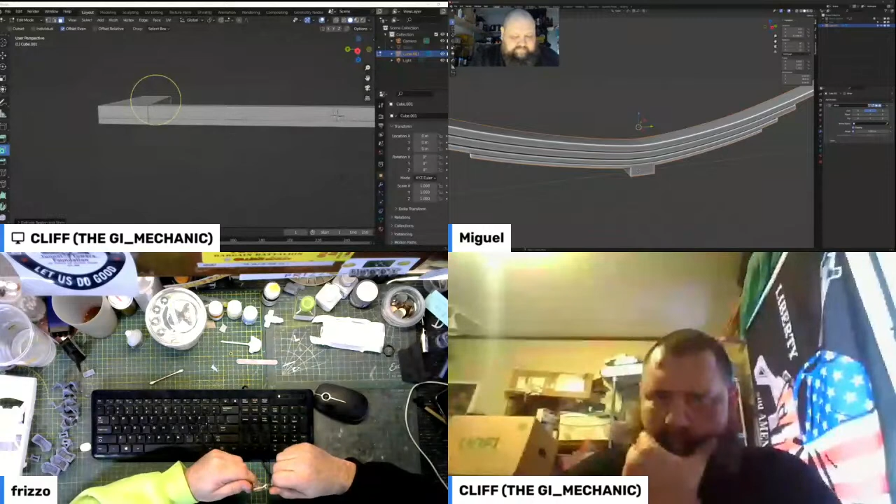If you're just doing this without streaming or whatever, it's a lot easier, but if you're trying to do it along, there's a little screen there you should be able to throw up where it says screen sharing. I see that, I've done that, and I could share it, and then I can go back.

Yeah, so I do window, or do entire screen. I do this, and then I just share, and then I'll have to switch it.

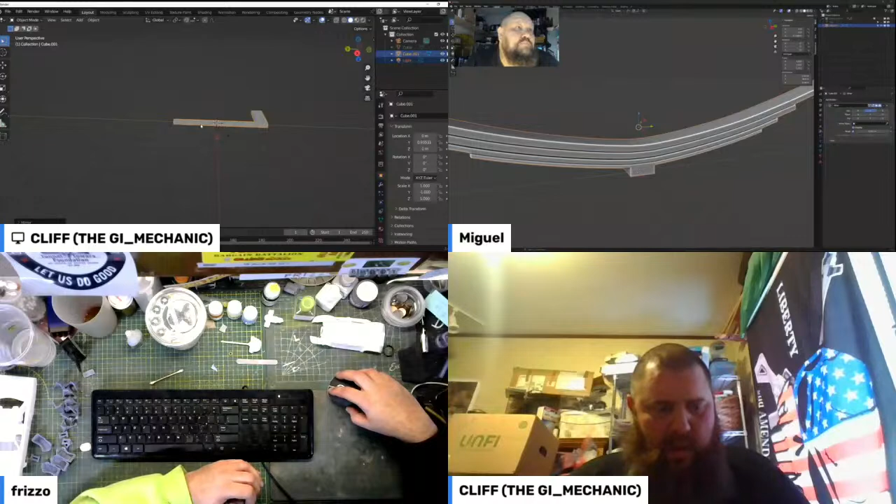Control D. Oh, what's that, a cookie, you mean? I haven't eaten anything yet, so I need to get some sugar.

Shift D, that should be duplicate.

I printed 20 surfboards. Yeah, but none with a shark bite. Nice. Ooh-ha. Shark bite, ooh-ha. Oh boy. Yeah, I got to do the shark bite. Maybe I'll do a shark bite one, and then I'll do one that's bitten in half. That'll work, that'll be cool, a big shark bite right in the middle of it.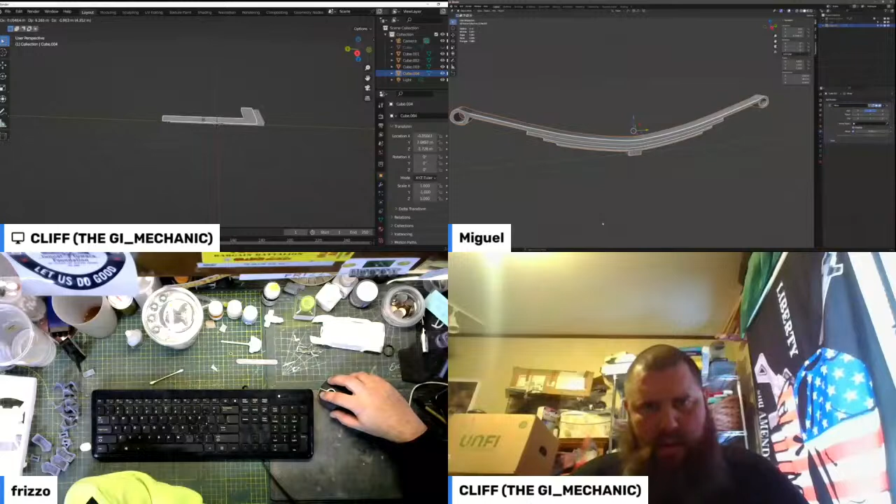Yeah, my daughter wants to go to Michael's. Yeah, there we go.

So we see your screen. That's me, right? And now I just go like this, and now you guys can see that, right? Yeah, we can see your Blender, but you can't see us, is that what you're saying? Yep. Right, I also have a Blender screen.

So if you tell me, oh, make this this shape, all I can do is go back to the Blender screen. What if you don't have it maximized? Did you click open, just not maximized?

Am I screwing everything up? No, I'll do just window, let's see what that does. Yeah, just window, it should bring up a single window.

Click on that share button, the share icon. Yep, this one, right? Oh, I don't know if you can. Yeah, click on that. And then you have a window option, right? But you're saying Blender's not in it, right? Because Blender's not on the browser.

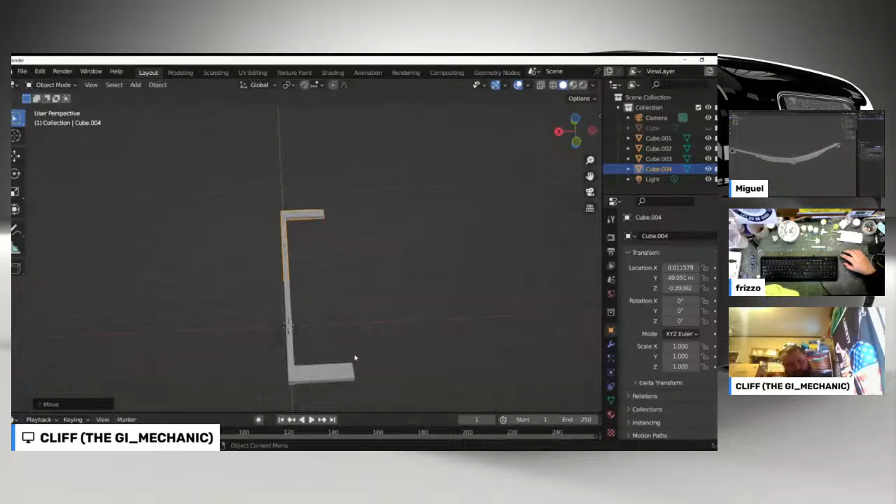I do window. So whatever's on the screen, right? Yeah, I'm not sure why it's like that for you, because when I do it, I see all of my windows. You know what, I probably just downloaded it and it doesn't see it. I don't know, I'm not worried about it. I'm going to have to rewatch this about three times to get what you guys just did.

Maybe I'll start doing a bunch of little short YouTube videos, like how to make a chassis in four steps. Just do the rails and then the cross rails, okay, next step. I don't know. Yeah.

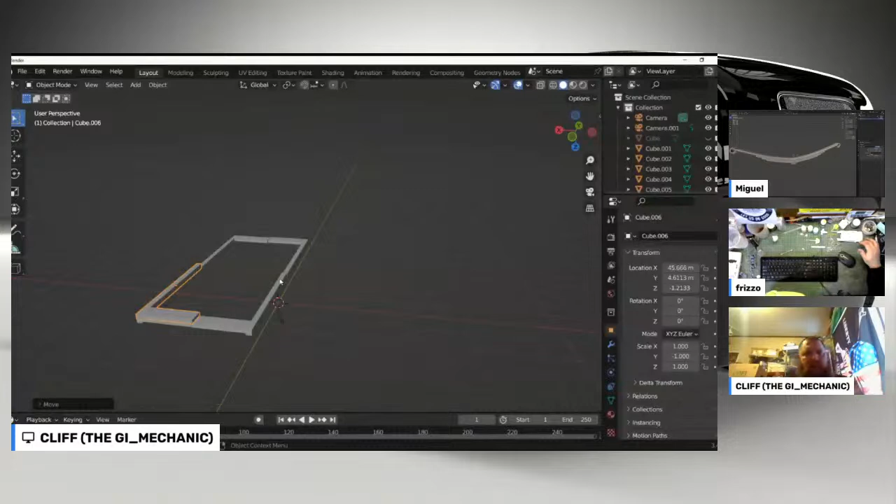What are you working on, Cliff? What are you making? I'm just making a regular kind of box frame, sort of. I was trying to work with the mirror tool, get some practice with that.

Are you doing this off of memory, or are you trying to look off a picture? Well, I'm trying to do it from memory and using some of the hotkeys in the mouse.

Why don't you look that orange truck up, that frame you had out there, the axles you sent me. Look at that picture and work off of it. Because if it comes from your head, it's like the way I think - it's a mishmash, I can't translate it. But when you look at the picture, it's like, okay, I got to bend here, I got to bend there, this part comes in this way. If you see it, I think it'd help you.

It's kind of tough to come out of your mind - well, out of my mind anyway. I've got 10,000 things going on in my head with ADHD. I got to send them to my email because they're on my phone.

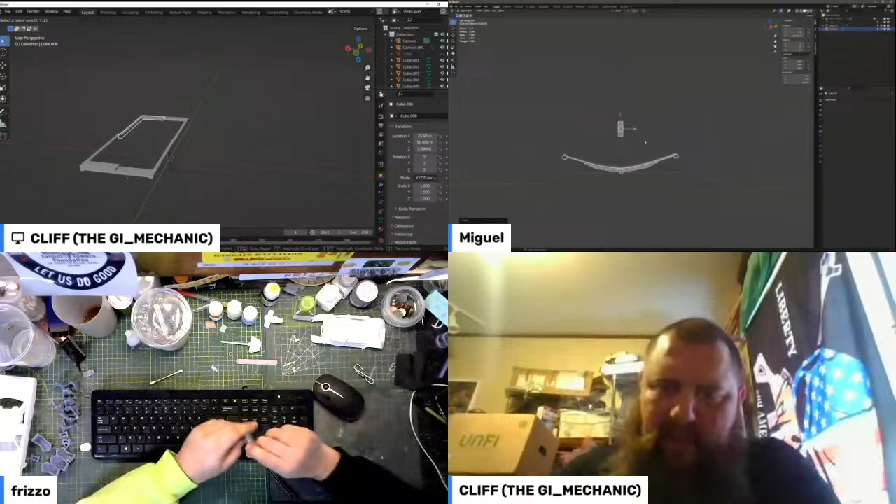Like that dirt car you're working on - the asphalt car, yeah. Are you working off of something, or looking at pictures? Yeah, I have a bunch of reference pictures that I download. Yeah, I think that's the best way. You need a reference because even if you want to do something different, you need something to start off of, like a base.

Like you do a basic GM chassis, and then you could do your off-road chassis off of that - pull and stretch it and modify it. I think that's what you do with the other stuff too, right? I don't know about the 32s you were doing - was that straight out of your head, or did you get something else and manipulate it from that?

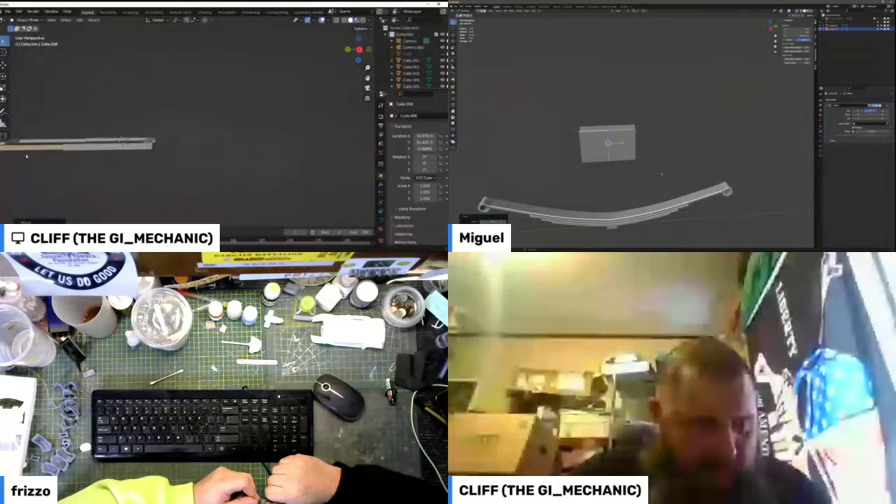The 32 chassis was basically me just kind of following - when I get these models from video games and stuff, they don't render or model everything. They just do the part you can see when you're playing the game, so there's no full geometry of the chassis underneath - they don't do the insides or bottoms. They only do the part you're going to see while playing. So what I do is create my own geometry and follow the contour they created, but I'm creating the whole thing instead of just the visible part.

So you're working from the outside in - kind of like tracing it, I guess.

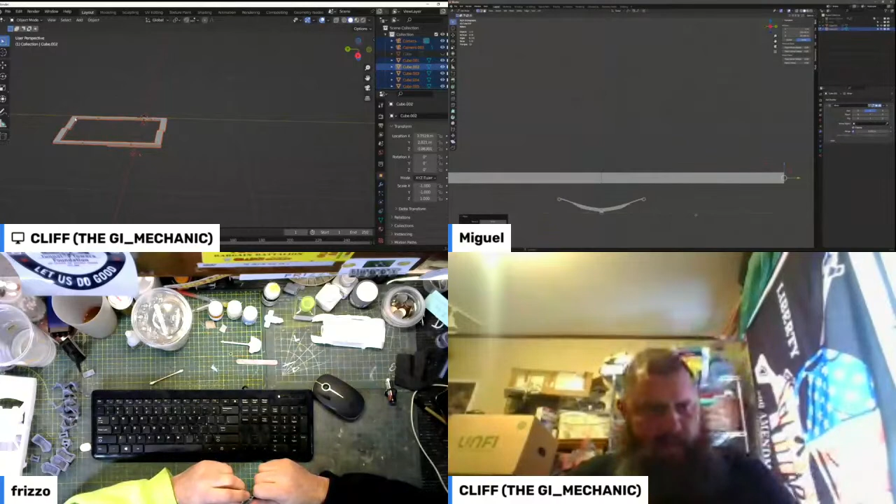Oh boy, somebody's not happy. Oh yeah, you can hear that? That's upstairs - the room above me, but it's a hardwood floor so it comes right through. I'll put it on mute. Sorry. No, you're fine, you're good.

So if I wanted a chassis, I would start with just a straight beam, and then I'm guessing if I looked at some reference pictures, there would be bends at various positions. Right, that would make sense.

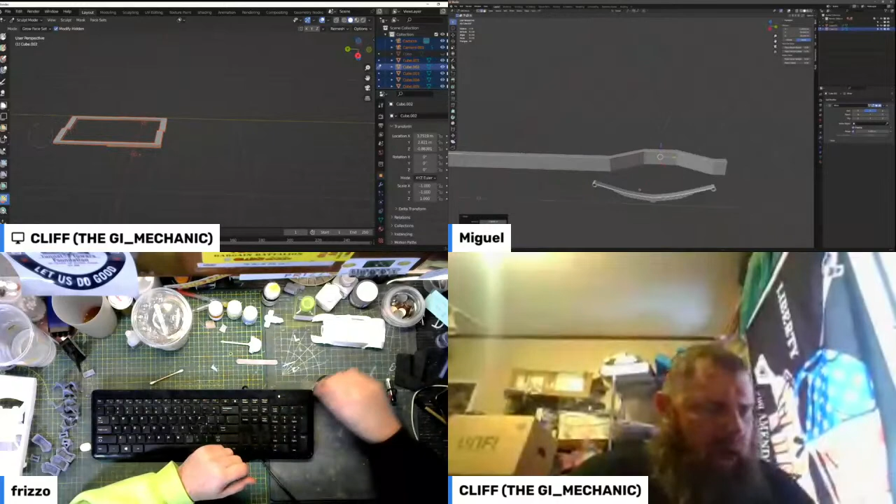What the hell was I trying - that's why I was trying to do grease pencil and stuff like that, to try and draw something out. Fuck, now I can't remember. So I can try to draw something out, maybe trace it, and - what's the word I'm looking for - like, not necessarily follow it, but yeah.

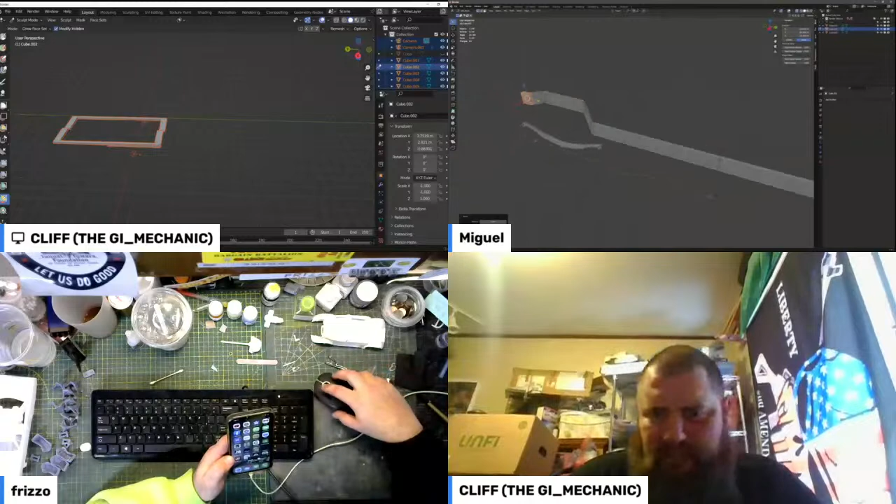I just had to give a thumbs up - should probably do that while I'm thinking about it. Good call. Man, they're freaking loud - mission accomplished.

What's up, Johnny? So what's the deal with Josh's interview - is he not running today? No, because Jason has his meeting today - that's right, club meeting. He's going to do it tomorrow. Yeah, okay.

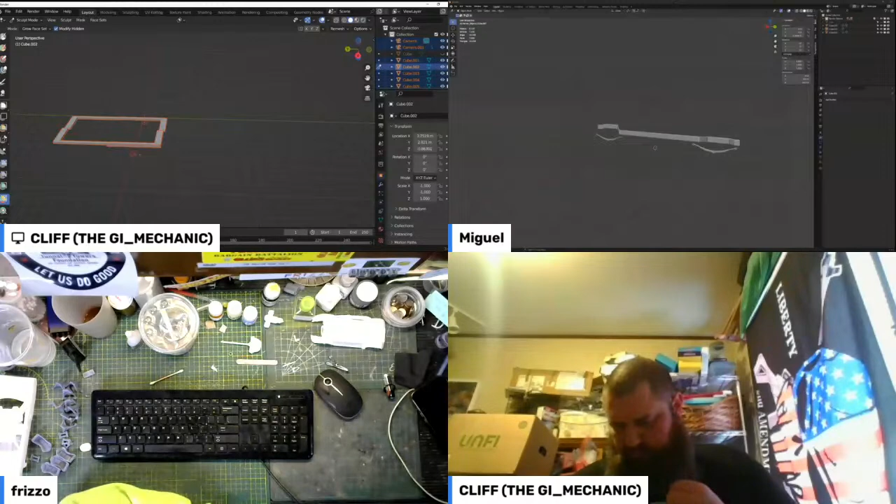I'm gonna drop the Blender - well, not, you know what I mean. I'm gonna have to go because my daughter wants to go to Michael's, and the other one's screaming his head off. I'm gonna go see if I can buy a model kit for $3 again today. Let's see, I want to go to Hobbytown and see if they've got any of those asphalt cars.

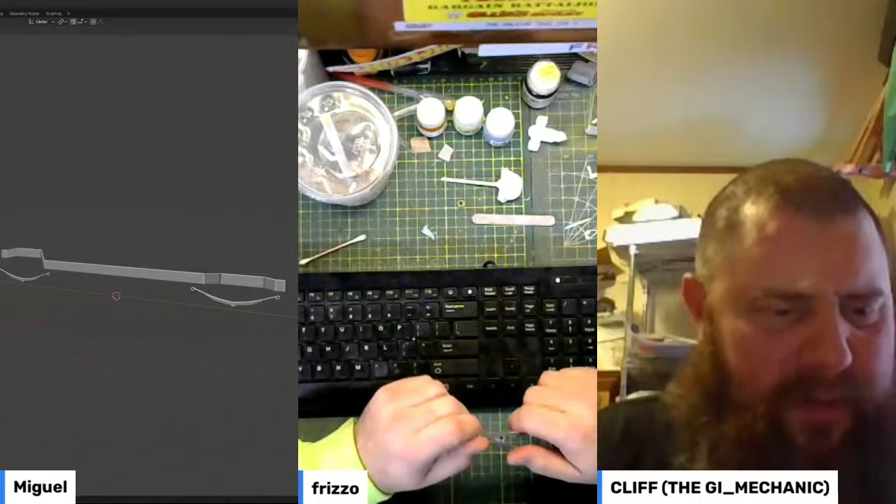Yeah, I jumped on it right away. What happened, why is it echoing? Is that me? What's up, Josh? Because I had to drop a thumbs up, I did it from my phone. Yeah, I got you, that's what I did too. But unfortunately since I'm going through my phone and it's playing - yeah, you had the volume up. Cool, what's up Josh? Hey, what's going on Josh, how are we doing?

Josh, if you do Chris CD Scales, if you do his interview, I'll do mine the week after his. Fred, are you using rattle can primer or do you airbrush your primer?

Yeah, take advantage of that weather. It's cold as hell here, so I'm not going to be outside painting anything for months.

That's all I need is another group build. I got like 5 of them I haven't finished yet. I've got a handful still from last year. Never did finish my Pro Street group build from last year, or my Fred Henry build. I still got those 2, plus big rigs and other builds I started that I haven't finished.

The computer's working well, so I can do it now. I'm confident I can do it better. Doing 2 semi trucks I still got to do yet.

Let's see, I got the USAC build, right? That's almost done - my USAC build is making progress. Already just for this year alone, I got 4 in the works.

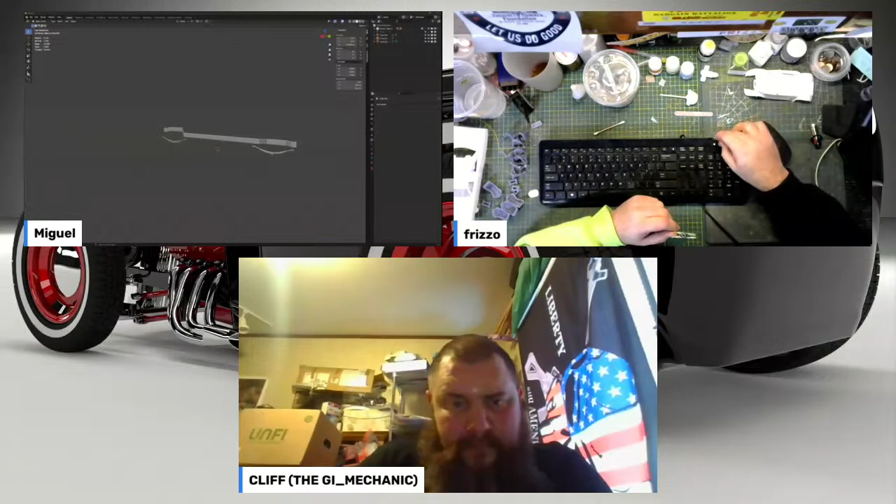And then I got 2 buddy builds. We're doing a Corvette buddy build, 1/8 scale Corvette buddy build with Terry and Extremis, Josh, and anybody else who has a 1/8 Corvette that wants to jump in. And then I'm going to do a buddy build with Brian on the General Lee - 16 scale General Lee's, nice. And then a buddy build with Russ from RT Hobbyworks - we're doing 57 Chevys.

I'm doing my first gasser, my 55. I got a gasser today, Bill - that's going to be a nice kit. I'm going to do it just like the box art, Cliff style. That's sharp. I took that one AMT gasser I got a couple years ago and made it a gasser because the front end was so fucked up on it - it was that black and kind of copperish looking.

When did I build that? Oh, it's out somewhere, not here. It's out on my shelf, which I ain't gonna get it. Me too, Brian. Me too.

Hey Brian, what's going on? Tamiya primer - okay, I have tried the Tamiya primer, and it's freaking awesome. I do like that stuff.

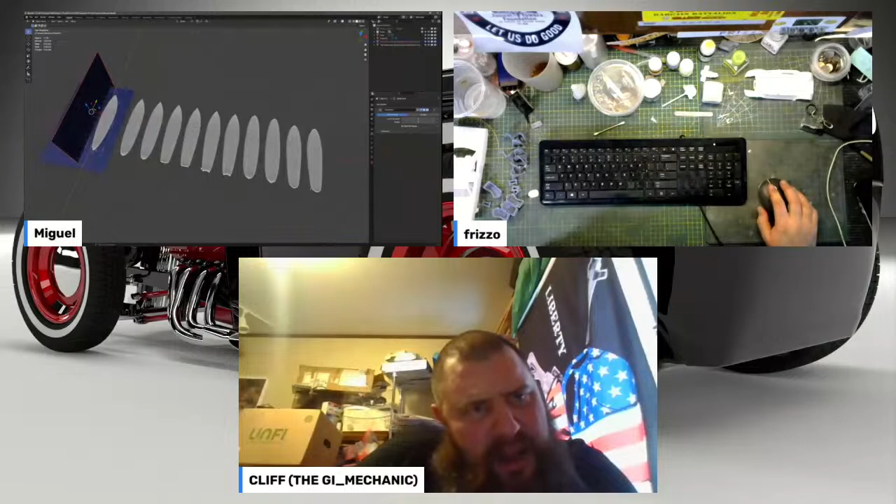That particular image, now you've got that on 2 axes? Yeah, I did it on 2 because I have a top and a side view on that image that I was using as templates to build my board.

Okay, because I might look for some templates and see if I can do something like that, try to trace it out. Yeah, see, I use that as my template. Okay, that's all I did. Okay nice, like I said, just trying to get ideas.

I mean, I'm getting some of it. Like I said, just a little bit has helped, it's just trial and error and practice and learning the hotkeys. So once you learn the hotkeys...